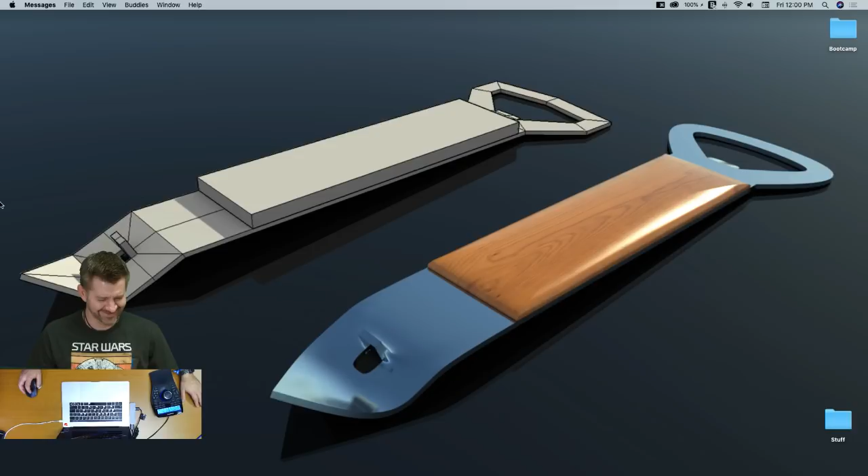We will officially, kind of officially get this thing started. Is this like the Waiting for Godot episode of the SketchUp live stream? That's right. So we already covered, unfortunately Matt is not here. He's here, but not here, so he's hanging out with you guys on the other side of the camera. We do have Mr. Mark Harrison over there. You guys can't see him, he's over there, trust me, you can hear him. So he'll be helping out when I am here, help me out when I accidentally ignore you guys.

So I like to think of myself as a little bit of a wild card today, Aaron. I'm going to be your wild card, let's mix it up. The great thing is that I can actually see Aaron's facial reactions to my wild cardness in real time. Yep, so it'll be a mask of professionalism you will see right here. It's always that with you. I know, that's how I roll.

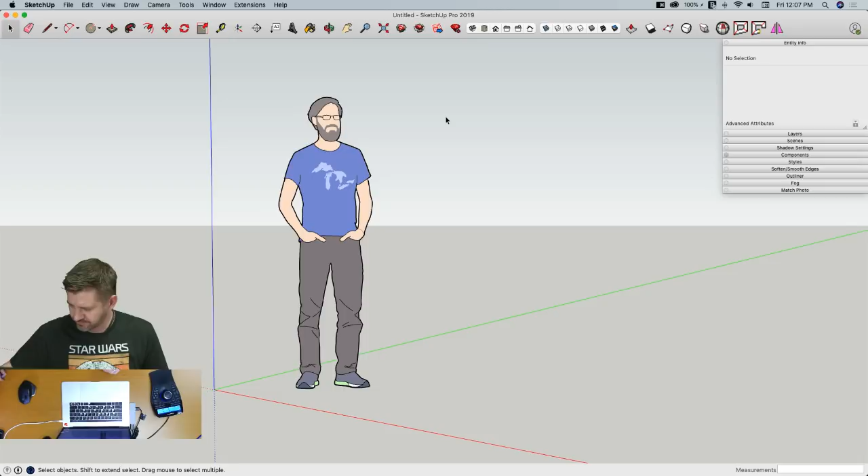We'll throw a roof on here. I have somebody, I was going to write his name down - I think I did, but I don't remember where I wrote it. He keeps asking for a specific type of roof, and it's not that complicated, not that different from a standard roof, so I figured I'd just show it when we get to the roof portion. So that's kind of where we're going to go - continue on down here.

George Knowles, how's it going? He says it's cloudy here today in Wisconsin. I wish we had a little cloud. It's sunny and warm here. And as we've discussed, we don't have beaches.

So Uganda. Marvin's asking about extensions or native. Most of this will be native. I can't say I won't hit an extension somewhere, but I want to do a lot of this with native, not because I'm trying to do anything special or make a commitment to go all native. It's just what SketchUp lends itself to, so I don't know that I'll be using a whole lot of extensions for this one.

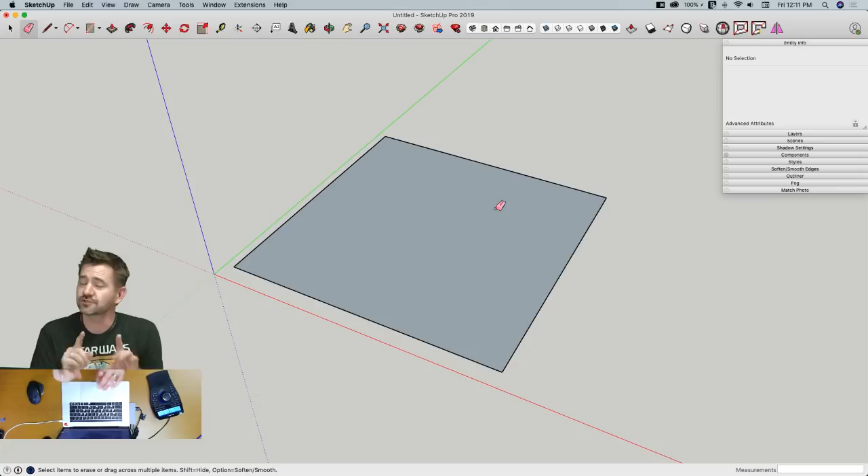I'm not gonna say no. How's that? You haven't said no, but you've said no twice to my ideas. That's right, there hasn't been any no's yet. There are no bad ideas. That's not true at all - we should clarify this, there's lots of bad ideas. There's certain situations where it's not bad to throw bad ideas out though. All right, that's all I'm gonna say about that.

Let's go back to this 8x8 footprint. Here's how I would go through this - I'd say what I'd do is start by initially just mocking up a shape. So I'm gonna take this and pull it up, we'll say 7 feet. I want to put a fairly full height door in here, big enough so I don't have to duck my head going in, but at the same time we don't need a full 8-foot or 9-foot tall shed. So if we go this big, that's pretty good. And then we're gonna have to put...

Dr. Ahmed, you need to stop, you need to be nice. You can't be telling people to shut up all the time. You'll have to go if that's what you do.

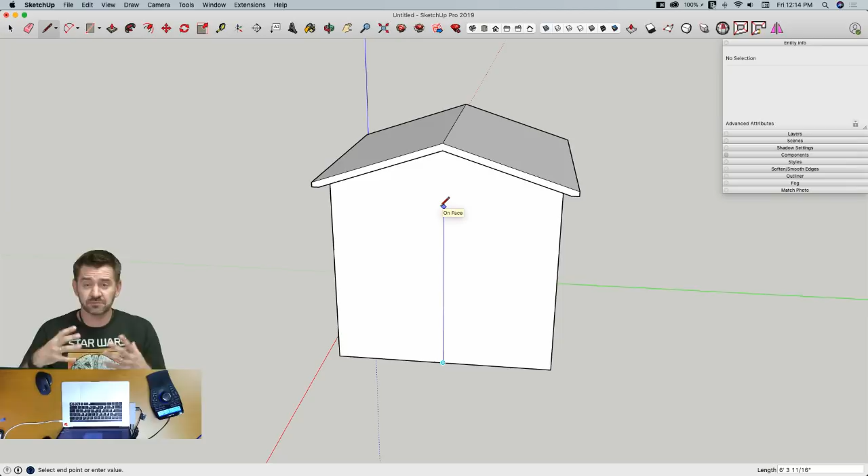I'm going to throw a door in here real quick. I'm not thinking a full height door probably—I'm actually going to build this door too, not a stock normal door. We're going to build a shed door out of some material, so that means we can make it whatever height we want.

I'm going to make it 6'3" tall, and I want it wide enough that my mower can get in and out without too much of a problem. So let's make it 3 feet wide.

The nice thing about this—because I know who's sitting over here—we're going to get the request to change some of these dimensions at some point. It's going to happen. All right, so there's my door.

Because we've already talked about it, I'm going to throw a window in here too. So maybe the concept here is I'm building this—I'm modeling this with the intention of building it myself. So I'm just going to say maybe I want...

I'm actually going to go to ReStore or something like that, and I'm going to salvage a window. So it's going to be a specific size—I'm just going to make up what that size is, because I can, because this is mine.

I'm going to put the top of the opening for the window the same height as the door, so I'm holding Shift as I'm on the blue axis and clicking right here. I'm going to say I got a window that's 3 feet wide and 4 feet tall, so I'm going to draw half of that—1.5 feet—and drop down 4 feet.

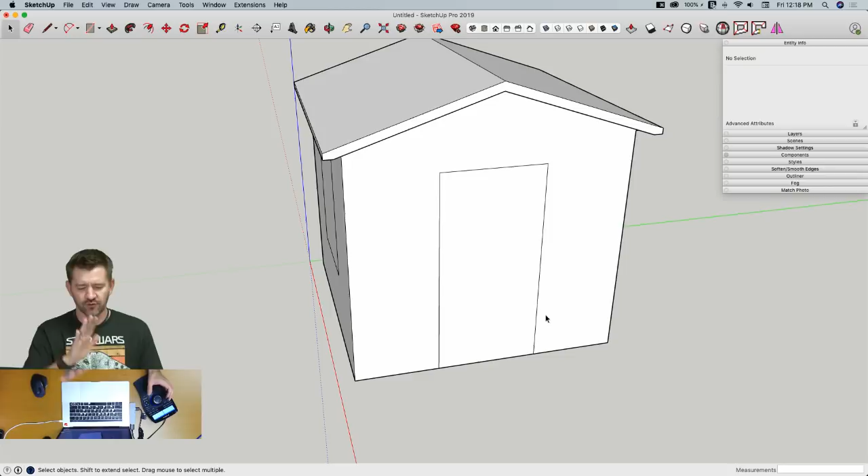Here's the idea. At my house I have a shed, and it has a door that opens out, but I've got a pretty small yard, and there's a tree next to my shed, and things I keep next to it, and a house. So I kind of always wanted a shed door that could slide, so that it didn't create that much extra room outside of the shed. So just throwing one at you there.

Maybe we could try something new later on, like a barn door that could slide across. Exactly, that might be pretty cool. And we've got time, I think we'll have several iterations of this design by the time we're done. So that's a good idea, remember that one.

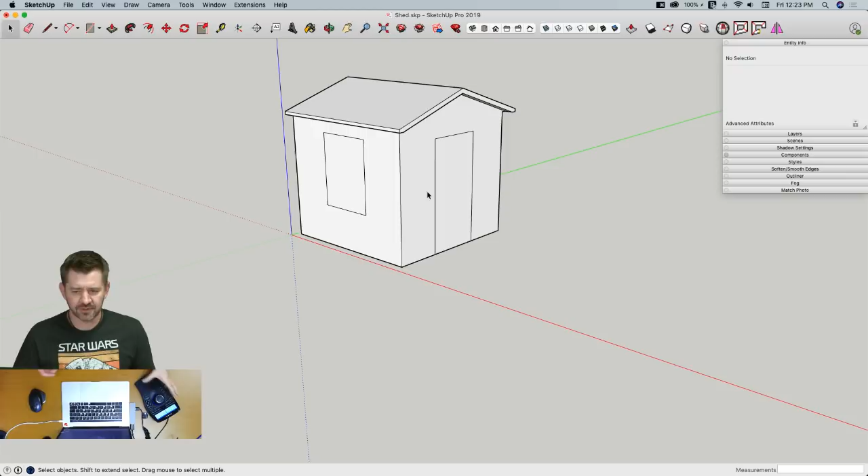So we are going to do that. I'm just going to leave this group right here. If I wanted to, I could right-click and lock this too, just to be safe, so I don't modify it or anything like that, kind of like a safety cover. You know those old switches in the movies where they have to flip off the switch before hitting the ignition button? That's what that is, preventing me from accidentally deleting or manipulating anything. It's pretty easy to come in and unlock it and make a change, but I'm hoping I won't do that. All right, that's enough talking about things.

So what I'm gonna do right now is start the ground and work my way up. I want to frame as much of this as possible, and then go in and check what materials I had and get a list of it. I'm gonna use Generate Report to generate a complete list of the framing in here.

So let's start there. First thing I'm gonna have is my flooring. I have to think about how exactly I wanna do this. I'm gonna try to keep the top of my flooring at this height right here. So I'm gonna come over and draw a rectangle, and make that rectangle 4 foot by 8 foot, enter. All right, this is one sheet of my flooring material.

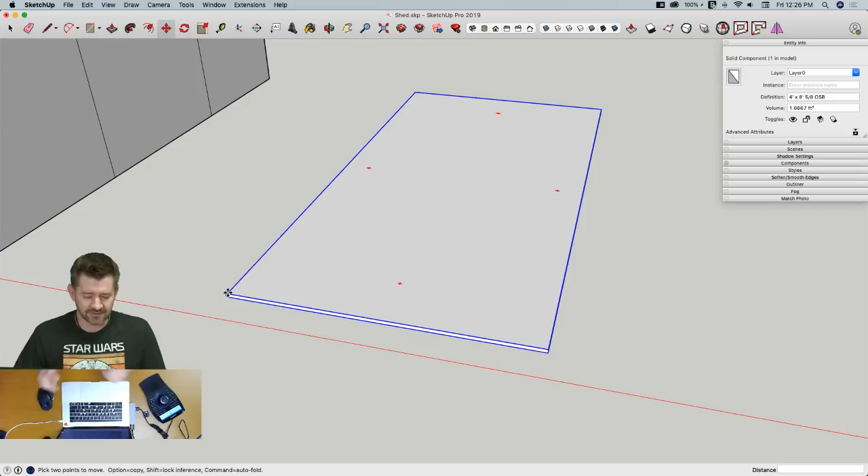All right, so there is one sheet of my 4x8, 5/8 inch OSB. Sometimes the mouth starts and the brain just sits back and watches and sees what's gonna happen - that's what happened right there. How often does that happen to you? More often than I'd like to admit.

So right here, I don't know if you guys caught that either, but I did push pull down. If I look at this directly from the side, there's my red axes - here's the bottom of my building going up, and here's my OSB framing down. So this zero height is gonna be the bottom of my framed wall materials.

All right, so I need... Since you're doing some report generation later, what are you doing with the definition names there? I see you've got the definition names already in the component, in entity info. Yeah, I'm gonna try to be conscious to make a consistent and accurate naming convention as I create these components. You guys know I try to make sure I name it, because I have a lot of bad habits - hopefully you guys are steering clear thanks to my general bad habits. I always had a bad habit of just using 'component', and then when you're done you have component 1 through 78 in your model.

So I'm trying to put names in there. What I'm finding is that unless I'm very conscious and intentional about it, my naming conventions change from one thing to another. So I'm going to try to make sure I name these in ways that make sense. That's right, if Tadros gets a hold of my model, I'm going to hear about it.

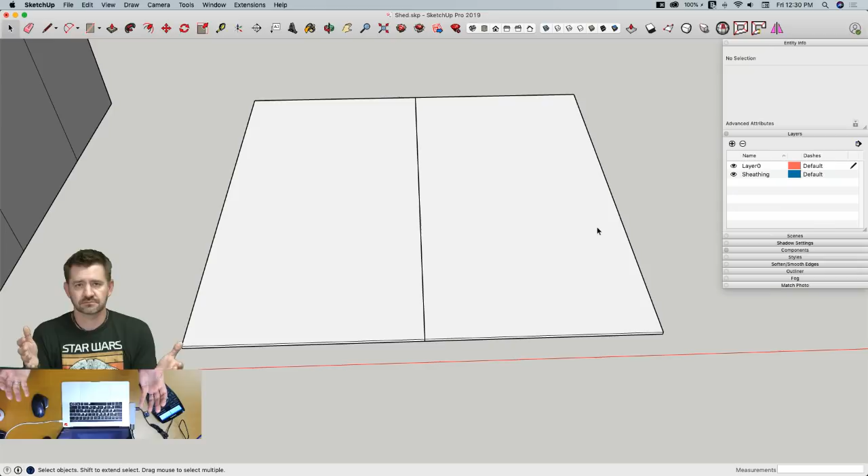So because of the direction of my floor framing, my joists are going to run this direction. Like I said, I'm calling them joists, but they're just 2x4 treated material. They'll be sitting on, I don't know, concrete or blocks of some sort. So they're not really structural or anything like that.

That's the other thing I should point out too - I am not going to go into member design. We're gonna throw some materials on here and assume everything works okay. If you guys have a really strong feeling that a different size material needs to be used, feel free to throw that out. But I can't say for sure, I'm not gonna be too hung up on what the proper span of a specific member size in the given usage is supposed to be. So that's that.

I know David's saying it should - see there, it's like I knew it was coming - be a 2x8. Yes, if it was spanning the full 8 feet and I had residential load on there, you're probably right. But yeah, I'll just put it 16 inches on center, it'll be good.

Anyhow, getting away from all those facts and knowledge and stuff, I'm gonna come in here and start framing. So one of the things I want to be able to do when I'm done, like I said, is get a material list. And that material list should include the number of a given material and the lengths that I need for each. So I'm going to come in here and start by creating a piece of material.

And this is just going to be a 2x4. Or I'll split the difference with you, David, and make the floor a 2x6. How's that? We'll go right in between.

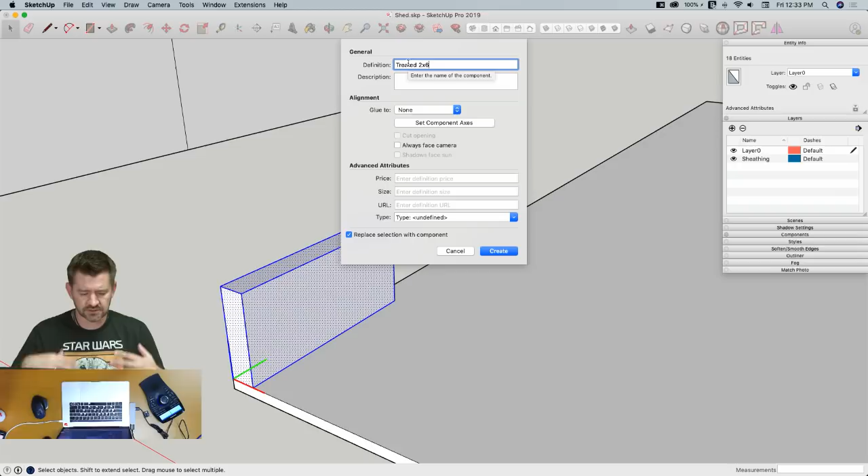So right now, all I've done is I have created this basically 1 foot 2x6. I'm gonna make this into a component, and I'm gonna call this a treated 2x6. I'm not gonna call out a specific material, and I'm not gonna call out a specific length, and I'll show you why. I'm calling it treated because this will be on the ground, touching soil or concrete, so I want to make sure I do that rather than a standard material. Right now, that's all I'm going to put in here, and I'm going to hit create.

There are probably 5 or 6 different ways that I could organize components for a material list using generate report, and that's not even including things like cut list or quantifier or estimator or other extensions I could use to generate this material list. I originally wanted to use one of those, but I didn't have time this week to get them installed and learn them, so that's why I can't do that.

All right, that's done. Now, if I was to run a list right now, what I would see is this: I currently have a single treated 2x6 and 2 sheets of OSB. That's good, but that's not really a good set of information to have for this.

So what I'm going to do is double click into this piece right here. One of the things we can report upon when we pull up generate report is the X, Y, or Z length. So I'm going to reorient my axes on this so that the blue axis faces up. Now I know when I report upon the blue axis for this given material, it's going to tell me the actual length of this piece inside of SketchUp.

So if I come in here, select this piece, go back to generate report, grab my live shed report and run it, it tells me I have one 2x6 at 1 foot long. So far so good. All right, so if I take this right now, grab scale, and pull that to here, and now go File, Generate Report, run it, it tells me I have one 8 foot 2x6. So far so good.

Let's keep going. I'm going to close that, and I'm going to finish out framing this floor. So I'm going to grab this piece by the corner, hit Option to copy, and put another piece down here on the end. These are going to act as my rim boards.

These are my end pieces. So I want to take one now and rotate it so it runs the direction of the joists. I'm just going to grab this one right here, go to Rotate, and Option Rotate this 90 degrees. Boom, it snaps into place. And of course this end is too long now.

So I'm gonna select it, hit scale again, grab it by the middle handle, because I don't want to deform the shape at all. I just want to change that Z length, and I'll snap it back to the face of that board. All right, now I'll grab it by the corner, option copy again.

And I'm gonna offset it 16 inches, and I'm gonna say do that X 8 times. All right, 8 was a little long, so I could actually type X6. I hit escape, so I left the command. I can't do that now, it's too late. Now I have to erase them.

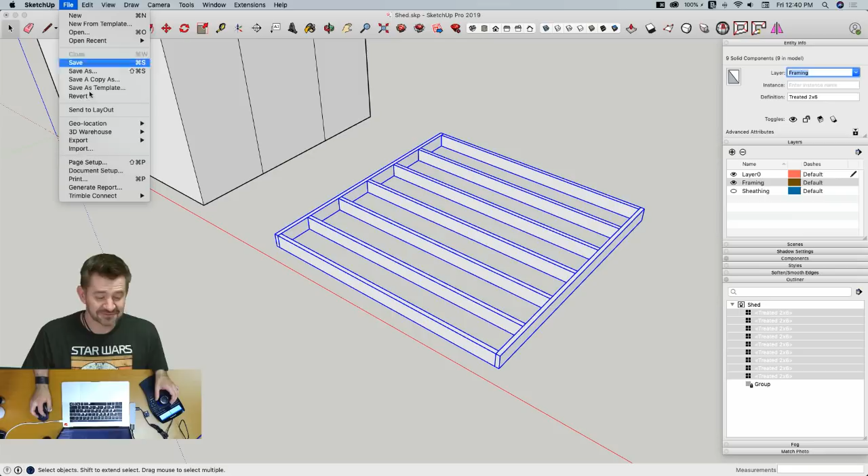So with this, we got a total of 9 treated 2x6s, 7 of which are 7'9", and 2 of which are 8 foot. Okay, so I got a question here.

What happens if you change the group by to the length? If you group by length Z? Let's do that, let's go back and edit this. This is my hypothesis. And I'm gonna grab length Z. Actually, I want to leave both, for future I want to leave both. Boom, even better, right? Good call.

I mean, I haven't seen it because I'm watching you on the live stream. I'm assuming that was a great idea. Yeah, so for now, yay, it's awesome. So I think you have the definition name, the length of the cut, and the quantity. I think that looks pretty good. I think this is gonna be a good report. Aren't you glad I showed up today?

I'm so glad. But by the way, we can wait till the end to really thank Mark, but it is kind of nice to have somebody in here, isn't it? Rather than just having me sit here, you guys appreciate it, you know you do.

What you should really thank me for is, well, actually I have to say, I'm reading the comments, and there are lots of people on this thread who know way more than either of us about actually building and making one of these sheds. So I just want to acknowledge there's lots of input about things you would actually do if you were building this right now that would be very worthwhile, but might slow us down a lot. So just acknowledging that probably things are a little uncertain.

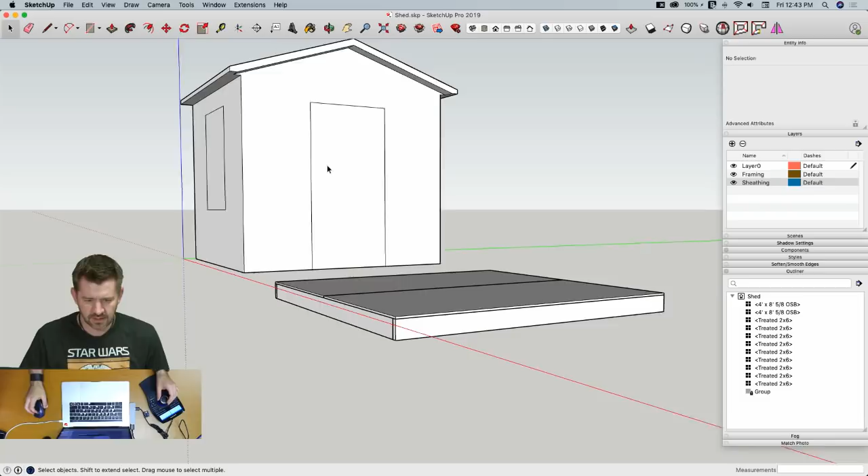Next step, next thing we need to do. Hey, somebody's just throwing out some ideas here.

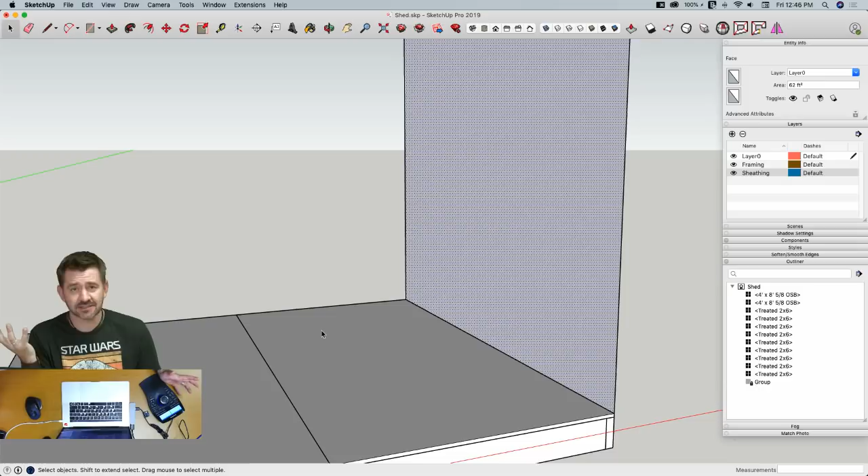So I'm going to frame this now with some more 2x4s. One of the things I was playing with for a shed, something like a shed, is you could actually build this pretty easily out of 2x3 material or smaller material. I thought maybe we'll just go ahead and put this all in as a 2x4, acting like that was the easiest thing we had access to, whatever. And then maybe what if we wanted to come back and frame the whole thing out of 2x3? What would that do to things like our pricing or material list or anything like that? Or our comment stream, or our comments that blow some minds.

So I think I'm going to do that. I'm going to start with a 2x4. I'm going to come down here on the edge and draw a rectangle. That rectangle is going to be... come on, let's get it together. There we go. Is going to be 3.5 by... I could put 3.5, comma, 1.5.

And I'm going to do the same thing I did before. Actually, I'm not, because I don't want it to join with that other geometry. I'm just going to select this piece right now, make it a component, and I'm going to call this my 2x4 plate. Whoops, or an 8x4.

Why not, before you click enter there, you can set the component axes. I could. Look at that. One less step.

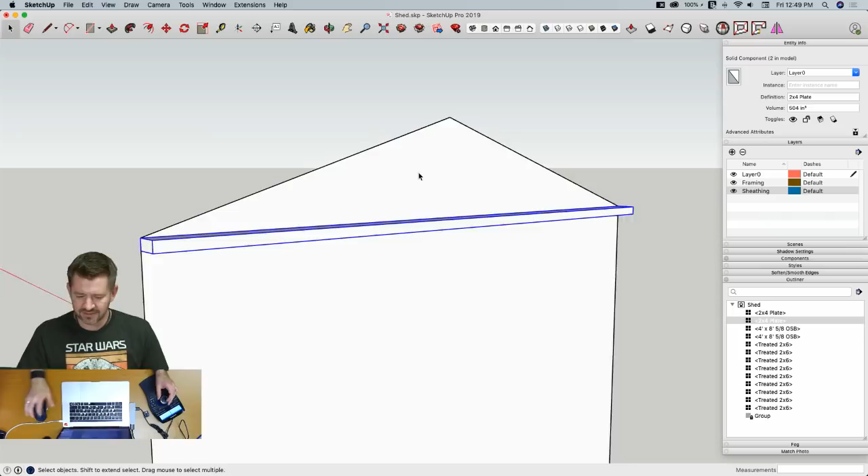I was thinking about building this as a gabled wall basically, having this come up, but I think I won't do that. Actually, after I did this, it's going to be such a small space in here that if I drop a vertical member here and maybe one more here, a piece of blocking, I should have plenty of space for my sheathing to go on.

I'm going to do it. I'm just gonna - all right, so I'm arguing with myself, yeah, so.

Now, people ask - so like I said, I used to do building design, and I used to teach people how to use proprietary software to frame walls. And that was a treat, because as many people as there are on the earth, there are different ways to frame a wall, and every one of them's right, and everyone else's is wrong. So it's kind of funny, because I'm already thinking of 5 or 6 ways we could do this.

I'm just going to stop thinking and talking and just make it happen. I'm just going to do it. I'm probably going to overframe this for a shed, just throwing that out there now. I could probably scale some of this back and not put quite so much material in, knowing it's a temporary structure, but I'm going to frame it in the style I would a real house, a full-size house. Because this was kind of in lieu of a full-size model.

So I'm going to go with that thought and say, okay, if I was actually framing these corners, how would I frame them? Knowing that if you were actually framing for a shed, you could probably dial some of this back and save some of this material.

Speaking of which, one of the things I will do is double my top plate. So I'm going to grab this one, make a copy straight down like that. And I'll come back to that in a minute. Now what I want to do is put my vertical stud, my stud material going up. These pieces are plate material.

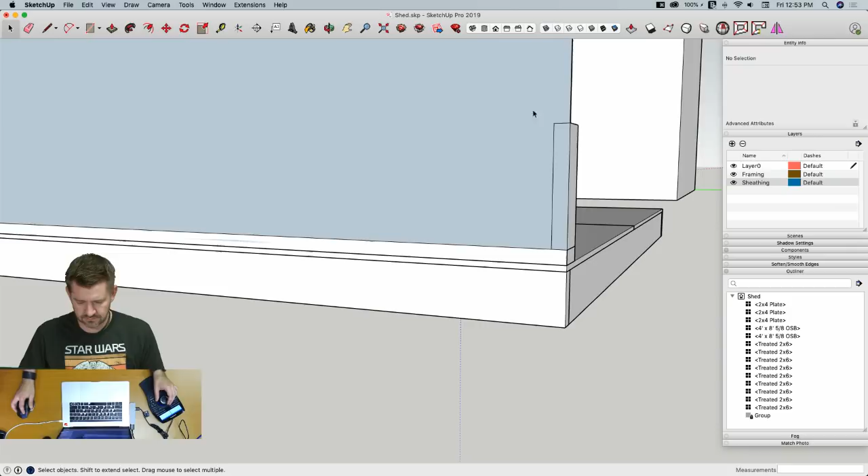Possibly. I just goofed that up because cut opening was turned on. I currently have this up against the flat of a face, so I was getting confused why I did that. I didn't realize that was turned on. Turn that off and set my component axes. It's not even gonna let me do that. There we go, now I can set my component axes and call that 2x4 stud.

So yes, it would be possible to play with glue to, so it drops in automatically. But I didn't mess with that in this particular one. Doesn't mean we can't do it in the future, I just didn't do it now.

All right, I'm gonna take this one, use scale again, pull this up to the bottom here. I'm gonna grab a copy of it, option copy, over to the end of my wall. And I'm gonna do this - draw a line across here, and then get rid of that geometry that I had there. Whoops. There we go, so that's what we got so far.

Like I said, this is probably not gonna have insulation in it, it's not gonna be holding up a second floor or anything like that. So my inkling would be to place these studs at 24 inch on center. So I might grab the first one, option copy, 24x3. There we go, that looks pretty good.

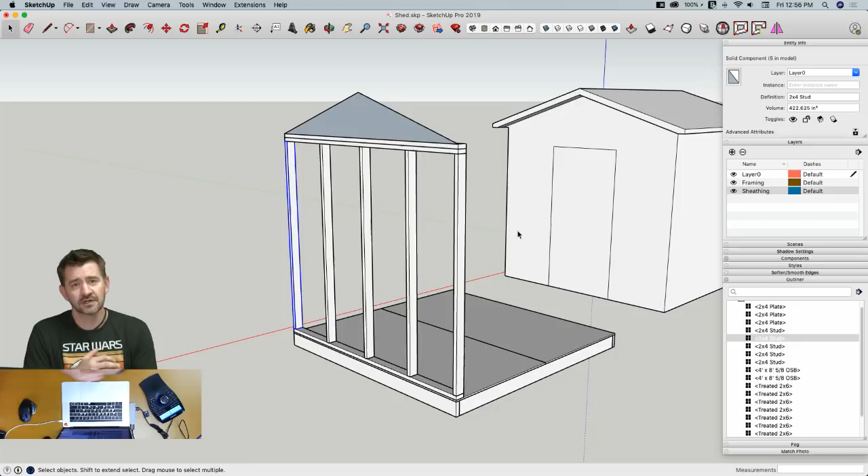Let's keep moving. All right, next thing I want to put in here - Jimmy's pointing out that these will not be pre-cut studs because they are an odd length. What was this, 6 foot 8.5? So I wouldn't be able to use pre-cut studs for this length. I could buy pre-cut shorter studs, but then I'd still have to go cut them. So that's something else to weigh in - when you're looking at material, what's going to be the best way to get the most out of this while keeping it at the head height I need.

So if I had a smaller set of material, if I wanted to use 6 inch or 6 foot studs and have a smaller door, I could do that. I wanted a full height door, that's a requirement of my shed. I'm not going to duck for a shed - just saying. All right, moving on.

So let's get our door in here. To keep it simple, I'm gonna trace this door. I'm gonna select it by the middle, and put it in the middle of our bottom plate - right there, that's where our opening's gonna go. So again, this is where I'm gonna have to come in and frame this opening. I can't just cut the hole in the wall, I'm gonna have to put something around this opening.

So what I'll do is I'll grab this stud right here, and I'm gonna make a copy of it right here, right here, make a copy of that right there.

Now I need to put a header in here, something to support this opening. This is a spot where we have a 3 foot span, so it's not going to hold a whole lot of load. It's just going to hold a little teeny bit of roof right here.

If you felt compelled, you could frame this as a full structural header. How much space do I have in here? 7 inches, so I could put like a multiple ply 2x6 up there if I wanted to. I'm just going to use 2x4 for this.

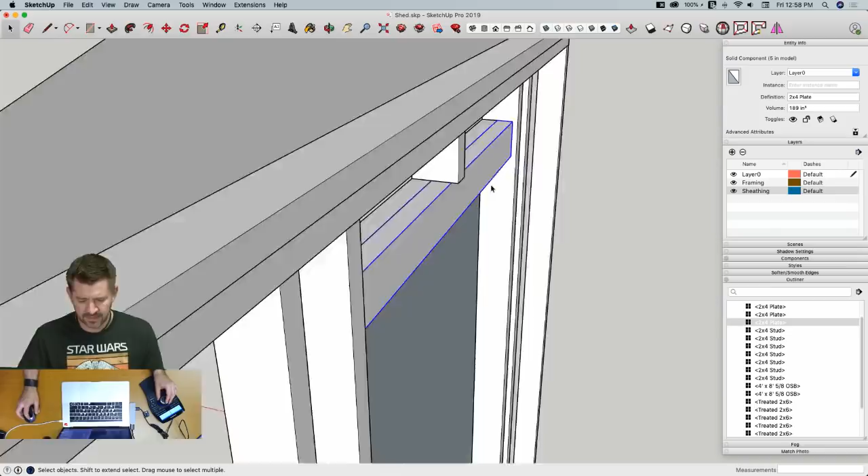All right, so we're getting there. This is okay. I'm going to double this header. So I'm going to grab that piece right there, Option copy, and make a second one right there. I think that 2x4 for 3 foot should be strong enough to hold up the weight of that door opening. I'm not too worried about that.

What I do want to do, and again this could be overkill, I could probably end screw these in and that would be strong enough, but in the spirit of framing this like I would a house, I'm going to grab both of these pieces, use scale to drop them down below my header. Then I'll grab both of these, use scale to pull that out to here, pull that out to here, and then grab a full height member here, throw that right there, and another copy right there.

All right, so with that, that is close to our fully framed front wall for our shed. Like I said, this is probably excessive. I could get away with a lot less.

In fact, if you ever go to one of the big box stores, Home Depot, Lowe's, something like that, you know those sheds out in the garage? If you ever go in there, you can see that there is very little actual lumber holding anything together. I think they rely a lot on the idea of the entire component, the whole thing being a component that works together. So the sheathing gets tied to the 2x3s, which get tied to the sheathing and the 2x3, and it's all together. It's a solid piece. In and of itself, any of those given pieces is probably a little floppy.

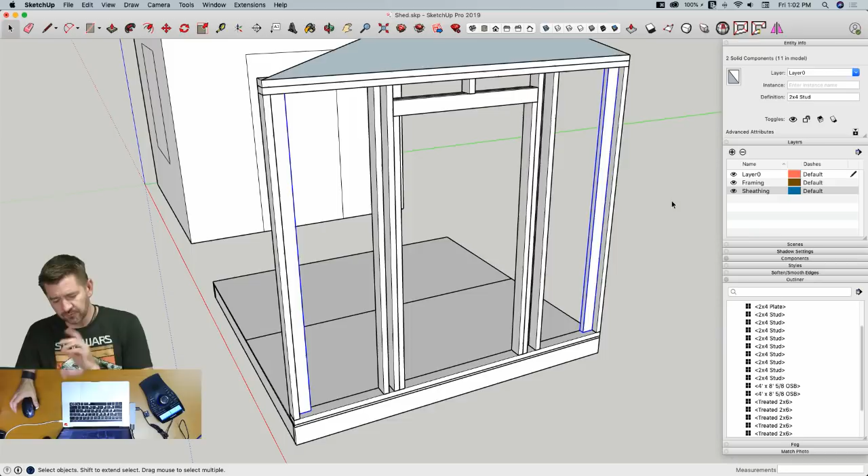Exactly, so it's not a bad thing to do. We could actually do it because it's also a good opportunity to show you how we can create multiple reports in a single job. So I might be able to do a report that says, show me my function versus show me what materials everything's made of.

So we'll do it. We'll go out to these outside studs right here. All right, I'm going to give a disclaimer. You guys will probably, in your experience of building, have different names for some of these pieces than what I throw in there. I accept that, I ask you do the same. I've had full-blown arguments break out in class because people disagreed on what was a jack stud in a wall. So we're not going to go there.

So I'm just going to call this one an end stud. I'm adding an instance name. An instance name is different from the definition name. The definition is all these components together are called 2x4 studs. The instance name says, what is this one specific piece called where it is used in this model? So these two are going to be end studs. These two right here, I'm going to call corner studs. Actually, just corner stud, since it is its own unique thing. These three pieces right here, I'm just going to call stud, because those are the on-center ones.

These two pieces up here, I'm going to call header. I'm going to call these two right here king stud, and I'll call these two right here jack stud. All right, and I'll go a little bit further, and I'm going to call this one a bottom plate, and these two right here I will call top plate. Whew, look at that, all that information, so much data. We're really doing the BIM thing, guys. Don't quote me on that one.

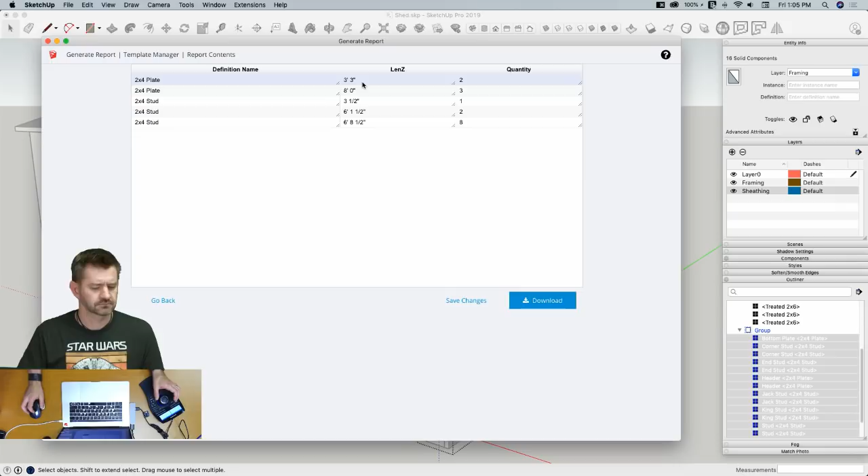Ooh, look at that. So we got two reports for plates, 8 foot and 3 foot, wait. All right, well that's something we're gonna have to look at. Why two of my plates say they're only 3'3"? We'll look at that. The rest looks right.

There's my 3.5 inch stud. Then I have two of them, those are my jack studs. It's 6'1.5", the rest of them all are 6'8.5". For some reason, my top plates, I'm assuming, since there's two of them... oh no, those are my headers. Everything's cool, guys, everything's cool.

That's why you need the instance name, so that you could have some clue of which 2x4. That's right. So we'll throw entity description in here too. Run that same report again. Oops, going back, I did the wrong one. Not entity description, but entity name.

There we go. So we're not segregating by it there, we're not actually separating our output by it, I just said include the information. So this just says these two are two headers. This is a bottom plate and two top plates. These are studs, jacks. This is a mix of corner stud, end stud, king studs, and standard studs. That might, however you do your thing, I'm not gonna tell you, but that might be good enough for what I need to print out. So if I'm just going and cutting, I could go cut it, label these or whatever, and then I know when I go to put together my wall, I have all my pieces. This isn't necessarily telling me where they go yet.

I could also go back here and move entity name up under group by. When I run the report now, it'll tell me you have a 2x4 plate that's 3'3" that is a header, and there's two of those. So even though these materials are all, for all intents and purposes, the exact same,

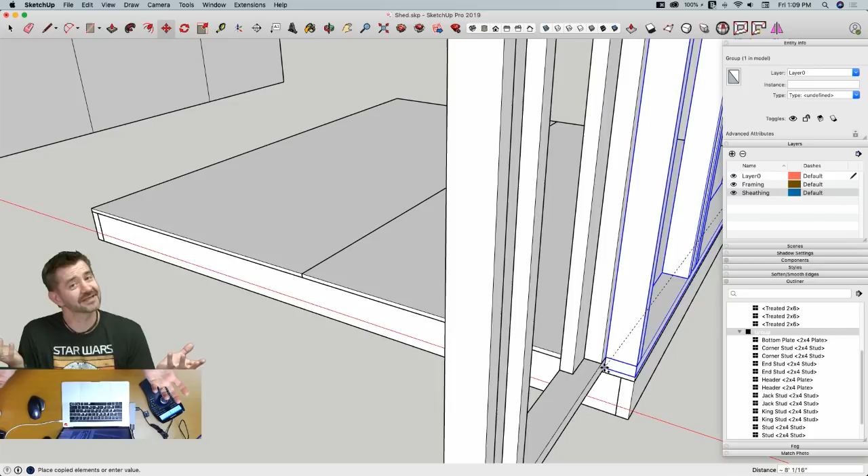Nathaniel Wilkerson also says this is BIM. And if you guys have heard my podcast, you know I have some thoughts on BIM. I won't go into them now, but I agree. This is Sparta. As soon as we can come up with a mutually worldwide agreement on what BIM is, then I will say whether or not we're BIMing. Until then, everything's BIMing and nothing is BIMing.

That's what I got. All right, I'm gonna grab this wall by the corner and slap it right here and use rotate to— whoops. Oh, Dave's got your back here too. We just have a door on each side.

Just progressive design, that's right. Whatever. All right, so this is too much, obviously. And this is just a group, this is not a component, so I can make whatever change I want in here.

I know that I can get rid of this stud right here. I can get rid of all of this framing right here, get rid of all this framing right here and this piece right here. That maintains my 24 inches on center.

I could take this guy and use scale to pull him back down to full length. I can grab this guy right here and slide him in. This end stud's not going to come to the end of the wall, but we'll probably do the same thing here where the other end wall will go full length. So I need to bring that in another 3.5 inches.

Then I can grab my top and bottom plate, scale that— whoops, grabbed the wrong handle. Scale that back to the face like that.

That's pretty good. And we have another comment here, which I think is a good point too: if you're going to put a window in one of these walls, wouldn't you want to maintain part of that header to move it around for the window?

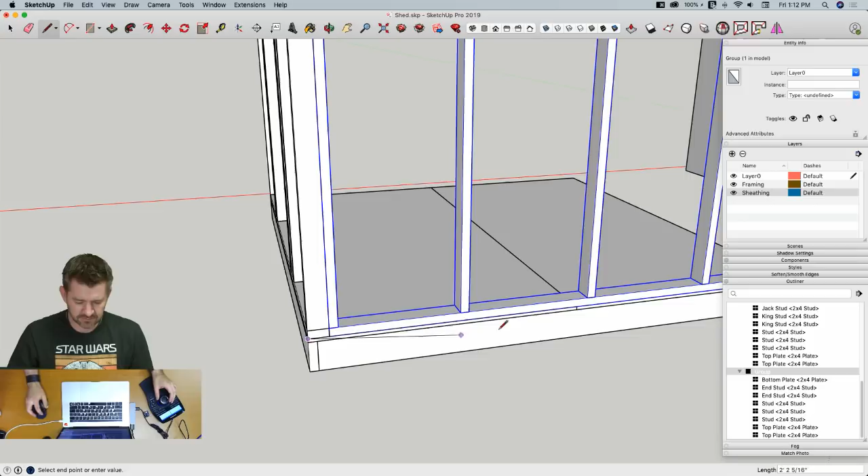So right now, let's just say I was to come this way, 4 foot, and then bring that 4 foot straight up to here. This is less than a full piece of sheathing, so that is very good.

All right, so that is temporarily my sheathing piece. See, the issue we have right now, and this is where SketchUp excels. This is why I love using SketchUp, is it's so easy to visualize this kind of stuff.

So the problem we run into is that our on-center spacing is nowhere near this stud. To have this sheathing break over a stud, I'd have to break it right here in the center of this one, use a full sheet here, and then use a partial sheet the rest of the way. So I'd end up having to split my sheathing and use it on either side. That's what we call dumb in the industry. D-U-M, dumb.

All right, so what I'm gonna do instead is grab these 3 middle studs, and I'm gonna slide them over. I'm gonna grab them by the midpoint and bring them to right here. That's gonna give me, so I have to come out to the end of here. That gives me 4 foot this direction, 4 foot this direction. I'm good again.

I can get rid of this. Oh, now I have all these lines on top of my groups. Oh, loose geometry. If only there was an extension that would just clean it up with one click. There is. I could have run cleanup. I know somebody out there is already thinking it.

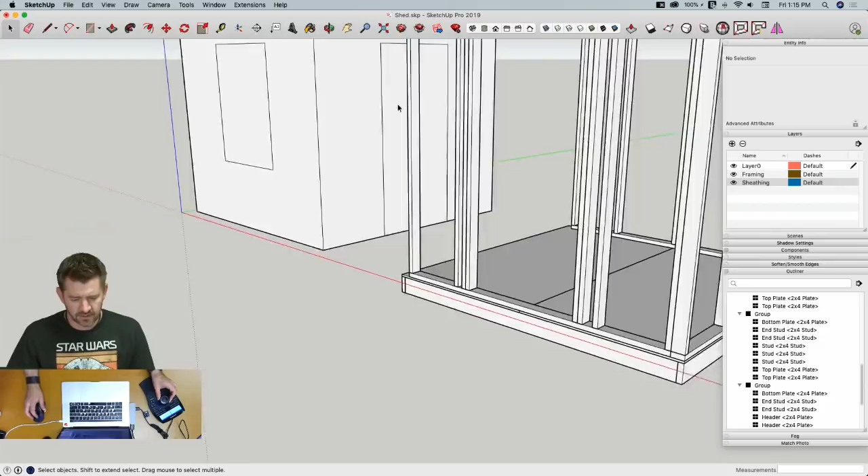Not quite there, of course. I do have to bring this down. So I said I wanted 3 by 4 was my window size. So that means I want to go, and again, I know rough opening size versus finish versus whatever. In case you guys didn't catch this, what I'm proposing is that I bought a window, reclaimed window or something like that, and the actual measurements was 3 foot by 4 foot. I'm sticking with round measurements because they're just easier for my brain to do.

So what I'm gonna do then is I'm gonna grab this line right here, and I'm gonna move it from this intersection point, Option, drop it down 4 foot, Enter, and now I'm just gonna use Rotate on the green axes to roll that flat. And there's my bottom sill for my window.

Obviously it's too big, it's running through the studs on either side. So I'm gonna select it, I'm gonna hit scale. And again, I can't see it, but if I'm careful, I can hover over the middle handle and scale that back. All right, it's looking better and better every time I look at it.

All right, so now I need probably something to hold up the bottom of the sill, and I gotta maintain this on-center spacing, so I'm gonna wanna copy this stud down. So I'm gonna do that right now. I'm gonna select this one, Option, and I'm gonna constrain to blue axes and drop it to the bottom of the sill, scale, and bring that straight down to here, and then make a copy, Option, copy here, and click Option, copy to here. And with that, our window is framed.

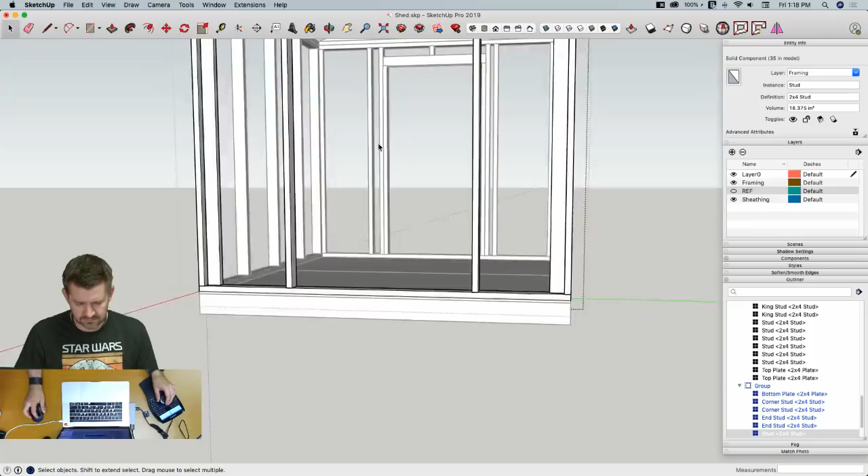Oof, not to make light of any of it, but some terrible luck with weather and wind. I saw a hurricane took someone's shed down. So very sorry if this live stream is bringing up any traumatic memories, I hope I'm not upsetting anybody. But seriously, let us know if the shed's just going down. Sorry, this is not supposed to be a bad thing. If anybody's flashing back and you want to step away, I won't take offense. So it's a triggering episode. Sorry guys.

Going back to what I was saying earlier about the purpose of the on-center spacing, I took this first stud and offset it 2 foot and created an array. The issue is that was 2 foot from the corner, the edge of the stud, to the next stud. Or maybe I came this way, I can't remember which one I started with. There we go, we're 2 foot edge to edge. That's okay, except when I come to this next stud, the one in the middle, you can see that 4 foot falls right on the edge.

That means if I grab a full piece of sheathing, go from the edge to right here, it's gonna fall right there. So somebody could easily argue who cares because it's really not doing much with that 3 inches anyhow, but we're gonna do this the right way.

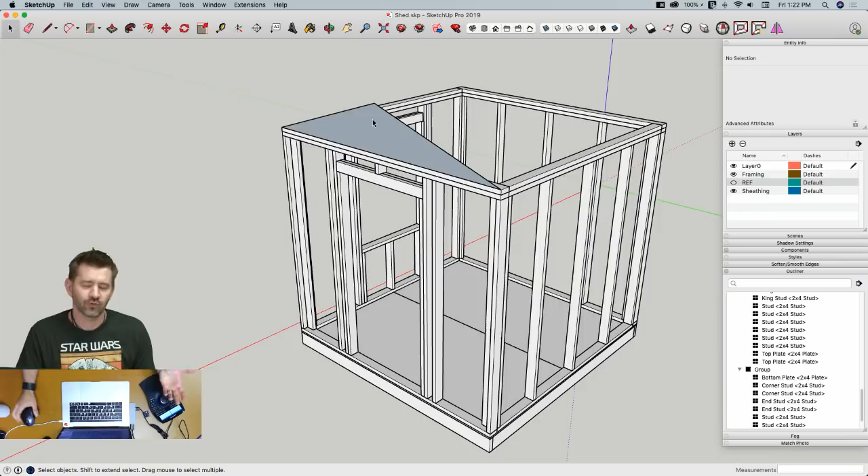Stillwater is great, it's a wonderful spot. They just have horrible weather with the canoes flying through and stuff. We need like a support group following this session. That's right, we're tougher, we got out of it tougher than we were before. My brother did get hit in the head with a canoe, but my head's fine, more or less.

All right, so I'm going to make sure I got all these right, make sure all of my stuff is in here. It's all on the framing layer.

All right, so here's the thing. Let's say I wanted to do a framing report real quick, just my wall framing. If I was to grab it right now, go to File, Generate Report, and say Run, we get everything, but we get too much.

All right, so right now, here's all of our plates. Our plates came on the list first. It did come through with our studs, and we got these four things that are just called groups. We're reporting Z length, so it's telling us our groups are 7'1". Those are obviously these outer layer groups for each of our walls. That's not a bad thing, it's not bad to have those.

There's reasons I may want to report upon it. Again, this is a pretty simple version of a framed house, but if I had my full house, I may actually want to do a report where I put an instance name for each of those groups, wall 1, wall 2, wall 3, wall 4, and I could use Generate Report to report upon those wall names. That is a cool thing it can do. But in this case, all I really want is the data on the inside and not the containers.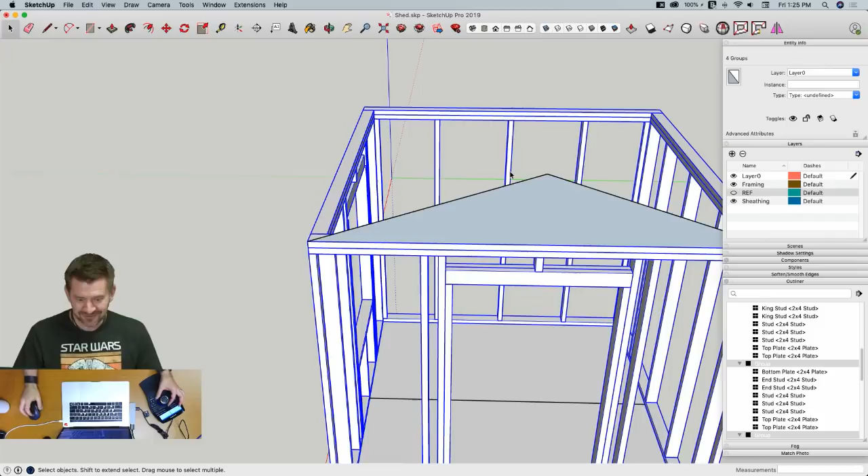All right, cool, so this is looking good, we're coming along. Let's go ahead and let's keep going, I'm just gonna keep moving. We're gonna go throw framing on top.

Here's where we can get— oh no, wait, I was gonna do my plate laps first. All right, so I'm gonna collect. I'm gonna stop, rewind, and try again. I'm going to open the group, I'm going to turn my rest of model back on. I have a toggle shortcut key connected to hide rest of model for when I edit a component.

I'm gonna grab this piece right here and scale it and just push it back to the inside of this plate. I'm gonna do that on both ends. Now I'm gonna click into this one. Actually, let's go shorten up both. I'm gonna go to my end wall, same thing, scale, pull that back, over here, pull that back.

So one of the things that is coming up, professional wall panelizer framer type people will ask about my tolerance. I'm not putting any tolerance. You could, if you wanted to, pull this back by a 1/16 of an inch or a 32nd of an inch to allow for slop or swelling of wood, but it's my shed in my garden, I'm not that worried about it.

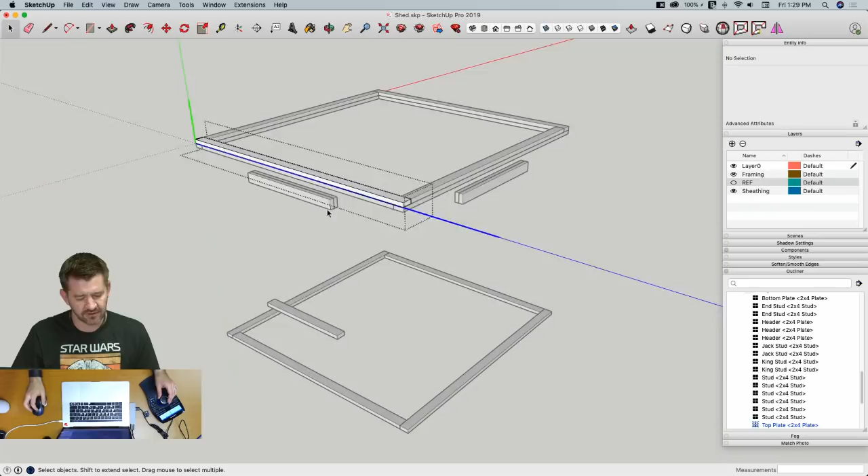This is kind of cool because that was actually what I was going to key in on. If I double click on this, this is going to show all the pieces that are the same component. This is where people go, wait a minute, components are all supposed to be the same. That's true, but because I distorted the container they were in, this component is the same as this component, but that one's shorter because the container's distorted. Kind of cool - same with my plates. If I click on this, I have all these different lengths, different usages, but they're all the same component.

This might be a place where color by layer can start to get useful. Because everything is the same component, even if you wanted to put a material on it to tell the difference, that wouldn't work very well. You don't want to just put materials on the wrappers of the individual components, but using your layering, you could do some more sanity checking along the lines of the report, and you could continue to save your model.

Yeah, I was thinking about that too - a big piece of that is absolutely true. A big piece of that is how much layering do you want to do? Because I could come through here, I could layer by function, I could layer by panel - each one of these walls could be on its own layer. I could layer by, all the studs are on one layer. So there's a lot of options here how I could do that.

And that's a good point. That would be a great way to do it, would be to segregate my framing types by layer and then color by layer.

Someone asked, is scaling easier than using solid tools and erasing the overlaps? Again, using solid tools will change your actual core geometry. That means if I was doing it that way, then this piece right here, this stud, would be a whole different component from this stud right here, which again, depending what you're doing, might be fine.

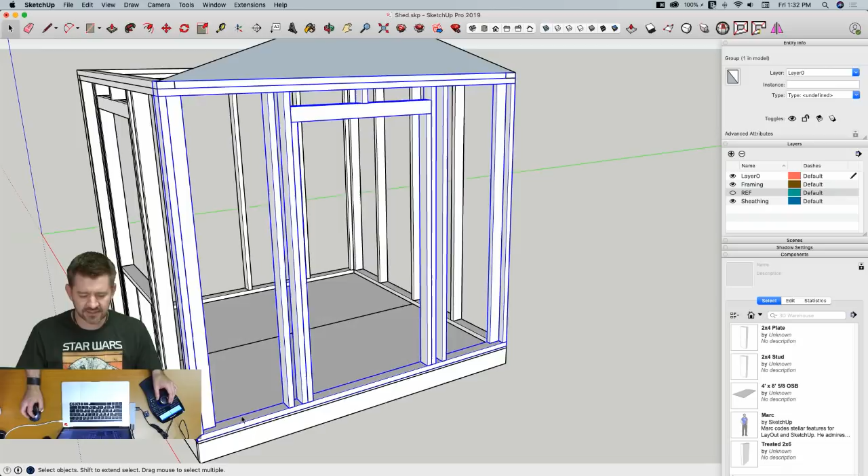I'm gonna leave it like this, because if I was to actually go build this, I'd probably build it laying flat on something like my driveway or garage, maybe even on this deck. It should fit since this is 8 foot. Build the wall laying flat, stand it up, nail or screw it down here and here, get it all square, and then cut this out. So your call.

Oh, that's another point. Dave Richards pointed out that if you use solid tools to intersect, when stuff just ran past each other and you hit intersect, solid tools will change that component into a group, so you won't have it as a component anymore. If you're doing that, right click, make new component. But yeah, I tried to come up with a good workflow to use solid tools to cut all my framing for me, and it never really worked out great. I never got an awesome solution for that one.

All right, moving on.

Well, let's figure out how to do this roof real quick. If I had access to a truss plant and Nathaniel Wilkerson's Medeek software, I could just drop some trusses in here and order them. I'm gonna assume that's not a thing I can do, so I'm gonna look at a couple different ways I could actually frame this.

Assuming I'm gonna have to do some kind of rafter type framing, I'll need to put up a member in the center that would hold rafters coming from both sides. I'm trying to think of the simplest way, literally the dead easiest way to do this. Again, this is only 8 feet, so I think I could probably put a 2x8 across there and that would span okay. Might have to double it up. You guys tell me what you think.

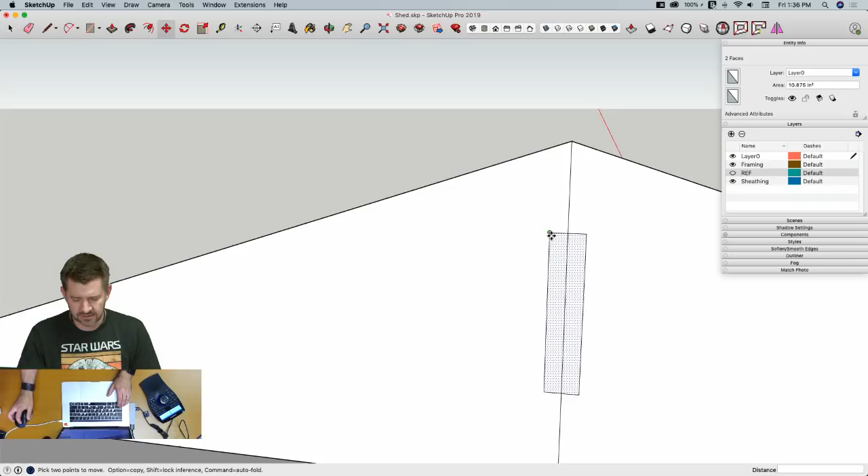Now I gotta raise it up to where I want the roof to be. This is the bottom of my roof rafters, which are gonna sit right here, probably with a clip or something on there. So I'm gonna take these 2 pieces, grab them by the corner, and slide them straight up till it intersects that line. That's where my ridge beam has to sit.

So I'm gonna double click that, make it a new component, and call this my 2x8 — I'll just call it a beam. Oh, anybody else catch that? I wasn't paying attention to what I was doing — I glued that again. Fortunately, we can edit that.

I say edit? Is that where... there we go, edit. Oh, I can't — components browser, I have the wrong thing selected. Select... I grabbed my OSB. Oh, there it is, there's my 2x8 beam. Edit — I want to turn cut opening off.

All right, now I'm going to come in here and get rid of this line in the middle, and same thing I did before, I'm just going to make it 12 inches long. So that's my initial size there, and now I can actually take it and scale it the full length of the building. Not just the full length — I actually want it to stick out a little bit on the front and back, because I'm fancy.

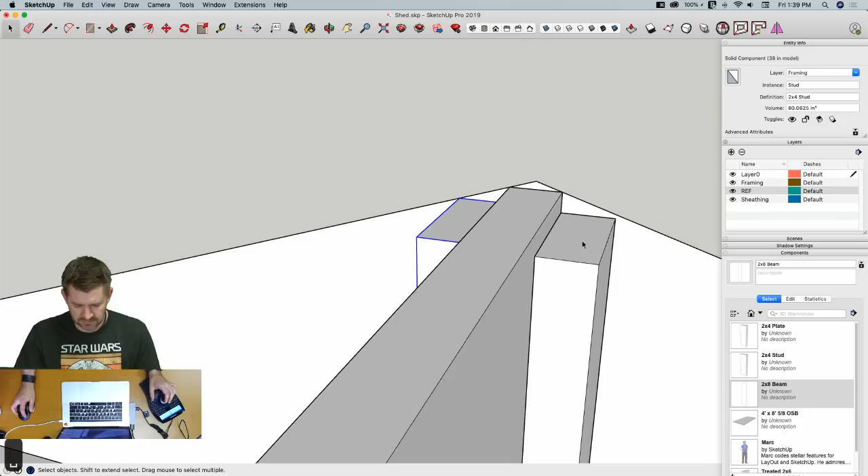Now that'll hold it up.

So a ridge board is a thing that is going to hold up the rafters. So my rafters are going to be sticks, boards that are going to go from here down here. And I need to hold them up somehow.

Dave Richards builds actual trusses for his, so he won on that one. Yeah, this is where your model and Dave's model start to get - they probably become a little bit different now. We'll show Dave's later. Did that get posted? It didn't get posted, okay. It got emailed to me. Okay, I've been enjoying it personally.

All right, here's what I'm going to do. I'm going to grab one of these studs and copy it, and I'm going to come in here and paste this stud in, but I'm going to make it unique because it's no longer going to be a stud. It is now going to be a 2x4 rafter. And I'm going to call the instance rafter. There we go.

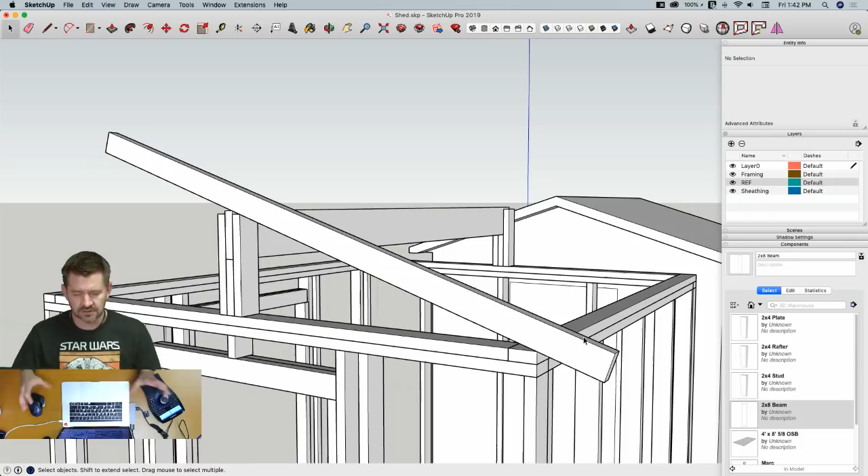All right, so I said I wanted a 6-inch overhang, so I'm going to draw a line right here, call it 6 inches, and run it straight up - whoops - straight up till it hits this face right here. And with that, I can come in here and draw a line perpendicular to the face. That's where I want this to end, so I can grab my scale tool again and pull it back to that surface. All right, now the top end.

So here's the question, because this is going to be interesting - I'm only going to have one rafter profile. It's going to be the exact same front to back, both sides flipped around. But what I would probably want to do is put a cut on it like that, possibly a vertical cut on the other end too. Because if I don't do that, if I put a square cut on it like this, if I was to just grab this right here...

Gonna get funky, yeah, pull this back to here - I would have a problem with my other rafter that's going to come up the other side, or, you know, wait, how is it. I'm trying to do this on your screen like a weatherman. I could never be a weatherman, I take things too literally when I see them.

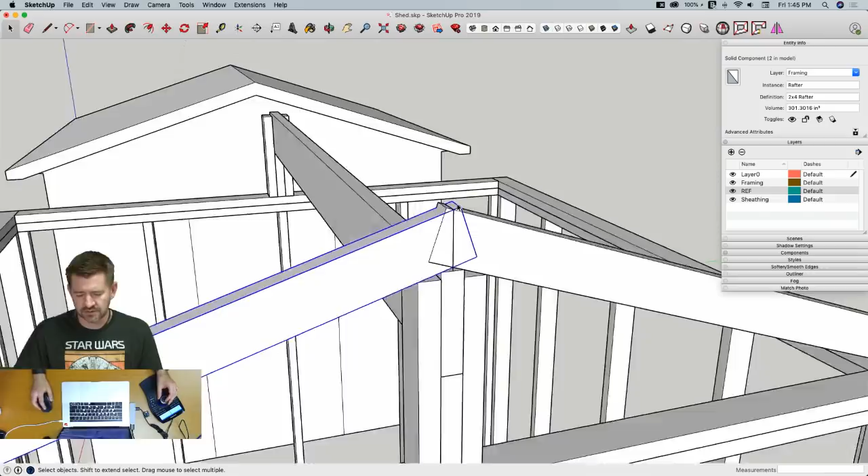You might want to do something like, I'm going to throw out lots of thoughts I'm having right now. If all I was looking for was a length, I just wanted to know what material lengths I need. You could leave it like this, and then when you went to mirror it, so if I was to grab this and mirror it over here for the rafter on the other side, you could leave it long like this, which would give you this full length, and then you'd have to be in charge, make sure you know you'd have to angle cut this at the end, that sort of thing. Not a big deal, but that would actually allow you to keep the same component. You'd have to know that you actually do want to make sure that when I pull this back to here, pull this one back to here, that would allow you to keep that same square cut component. So you'd just have to know that you're going to cut that at some point. But like you said, that is different from the roof rafter, basically.

I guess, right, you have to do a make unique for your first one. Right, since this is the only one, that's what I was saying, I would just cut it like this and then know that that's the piece I'm actually going to use.

Okay, so with that, I'm going to take these, option offset horizontally, 24. I should have to do that 4 times. And my last one, again, is going to be a little bit off.

So actually, here's what I should do. I'm going to get rid of what I just did. My sheathing will start right down here, because this is the flat end, right? So I'm going to start my sheathing here. It's going to go this direction, so I'll grab these two, take them, offset along the red axis, 24, times 4. So something like that is actually kind of closer to what's going to actually happen.

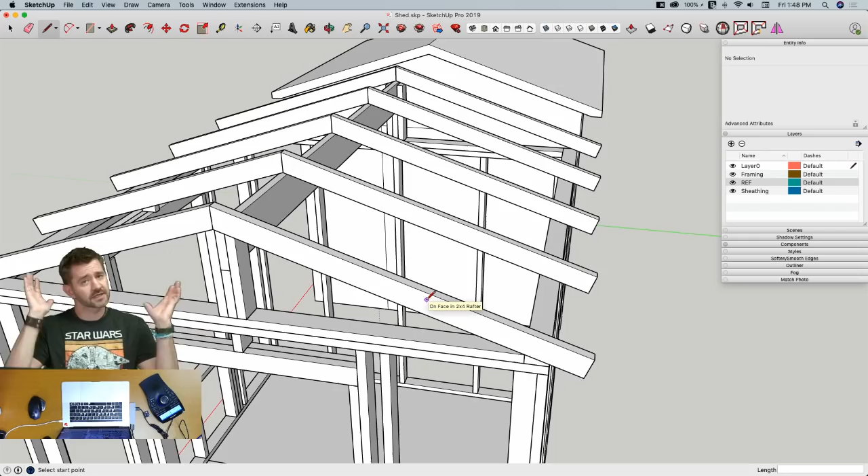It is pretty commonly done with larger material. The reason I probably wouldn't do it with this is it's only a 2x4, so I don't have a whole lot of material to cut out there. And again, dozens of ways to skin a cat. I would probably rely on hurricane clips on the top of the wall at whatever, 70 cents each. I would rather spend, you know, $15 in hurricane clips and just clip those onto the top of the wall rather than having to bird's mouth or bump up to a 2x6 and have enough space to bird's mouth it. Your call. Again, so many different ways to build things.

It's cool, it's fun. All right, so we're looking pretty good. There's probably a couple more pieces I would add, including, on the front here, I have to make a decision on what I want to do. I said I do want a little bit of an overhang here. I don't want it just to be flat up against the front. Maybe I will just have it stick out 3.5 inches, make it a whole lot more work for me for no particular reason.

Now let's go ahead and take this rafter, or this piece right here, and offset it.

Well, what should we do? All right, so if I was to take these ones back, we make that flush. So this right now, we could just sheathe right over, it would be flat, it would be perfectly fine. But what if we wanted to make it kind of cool and I wanted to take this and have it offset 6 inches? How would we go about that?

Well, we do something like take this guy right here, maybe he'll stick out like that to support that in the middle, and we could even do something like this. We come into this top plate right now, right here, and we would stick that out like that. I don't know, I don't like that. I don't like any of that.

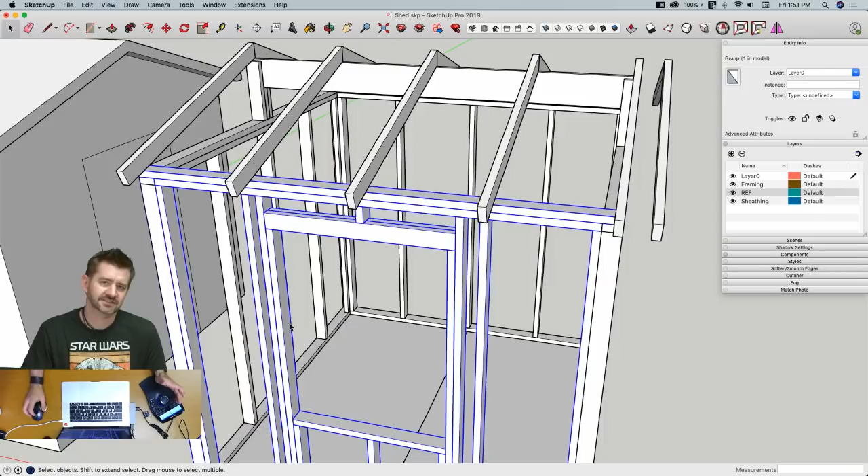Let's go ahead and... Nathaniel's saying too, this is such a small overhang that I could put a couple pieces of lumber around here to connect things, and then the sheathing will take care of the rest. That'll be fine, I was just trying to get fancy. I was trying to do something pretty. I let it go. Pretty things, there's no place for pretty things in the world of construction, except me.

All right, I'm gonna take this piece, copy it, and come out here, paste it. I'm gonna rotate it 90 degrees, grab it by the end, and I'm just gonna put this. All right, now I'm trying to think of where I should actually put this. I'll probably actually just put it right here. And then I'll rotate that, oops, like that. Basically create kind of a fascia right there.

And by doing this, I'm actually giving myself more than a 6-inch overhang. So if I was really hung up on that 6 inches, I could come in and pull that length up. Really what I would do is see what happens with sheathing. For me, this is a variable number, and depending on how the sheathing lays out, I may extend or shorten my overhangs just to make the sheathing work out better.

This piece right here, though, I'm going to call it... this will be whatever my rafter material is. Oh, nope, actually, so I shouldn't do this, I should delete this. No, I can't make it my rafter material, I have to make it unique, because my rafter material is not square cut on the end. So I'm going to call this 2x4, and I'll just call it what it is. I will incorrectly spell the word fascia. All right.

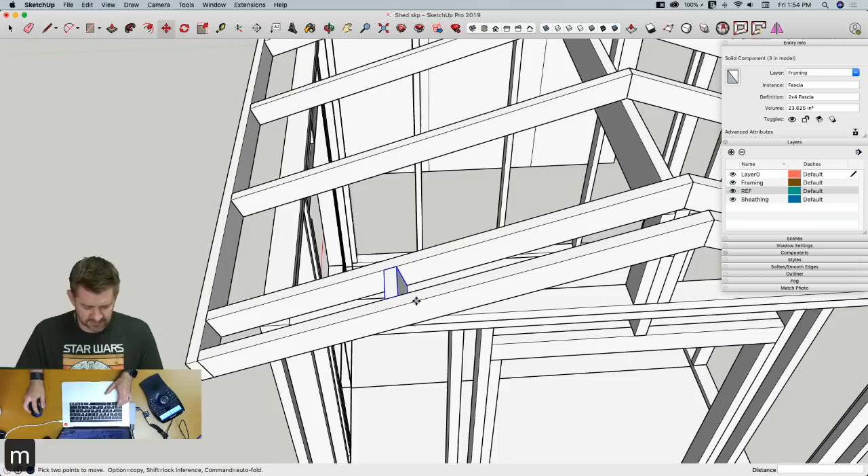And then I'll offset another one along the ridge, 24. Oh, I deleted my flag, I'll have to put another one in. And just mirror that with an option and a click from Curic. All right, yes, that's probably more than we would actually need on there, but I feel better having it. And it accounts for less than 2 feet of wood, so I'm good.

At this point, I am gonna grab this entire roof, everything that makes up the roof, and make that into a new group. So now I have 1, 2, 3, 4, 5, 6 groups thus far, and I should have my sheathing on one layer and framing on another. What the heck, ridge board? On framing, there we go. Framing, sheathing. All right, everything's coming up so far. This is good.

All right, let's go in and save, because I'm gonna do that.

Let me take a peek up here at what everybody's saying, because I'm not paying attention. Okay, there was the bird's mouth comment, I remember that. I'm good. And MJ Jason is referring to these support pieces as cripples, and I've always used the term cripple, but I've heard other people use other names, so I don't ever call them out as that, just because some people don't like that name. I don't know why. I don't know what Craig was referring back to.

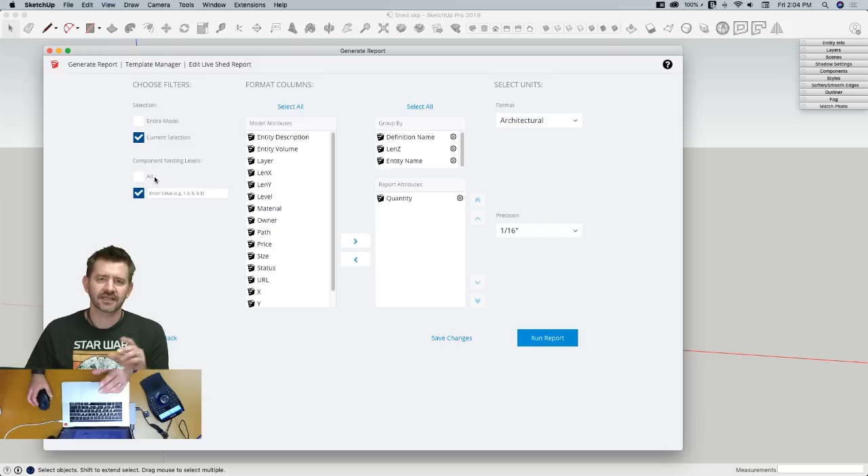I saved it as report all. I don't know if you guys remember, I went back and saved everything as report all. I made a change so it was reporting on nesting level 2, but I never saved that - I just said okay and ran it. So I'm gonna change it to 2. I'm not gonna save it now either, I'm just gonna go ahead and run it. That should give me all of my material.

So there, from the bottom up, there's my treated material. There's my flooring OSB, and then here's my ridge beam, all my other materials. Sweet, pretty cool. I could work with this, I could build off that right there.

All right, let's close this thing up. Let's get some sheathing on here. I'm gonna select this wall first, I'm gonna turn off the rest. And I guess I have to decide what I want to use for my actual sheathing.

Dave mentions that his wood shed is built like a brick outhouse. But I'm surprised, I was expecting - didn't you say, Dave, that you had put windows up high or something like that to let light in?

That's pretty cool. And Jimmy's pointing out that if you type tomato with enough extra A's in there, you can tell it's pretentious. That's an important thing to learn here as we go through this sort of thing.

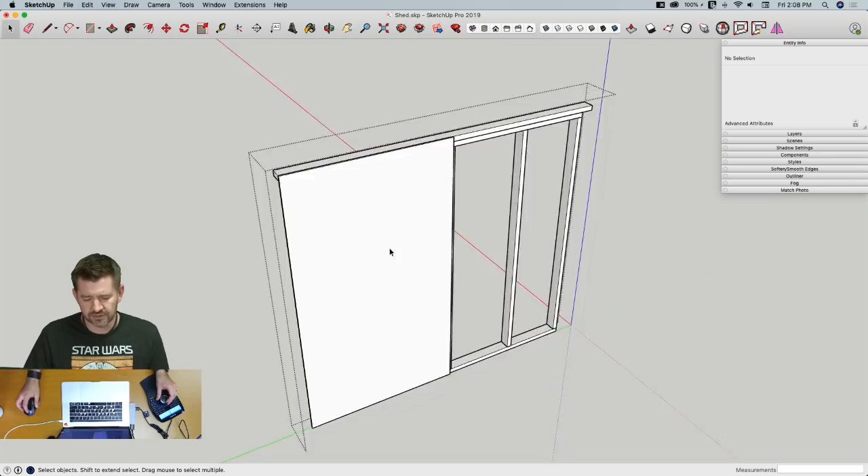So that's what I'm gonna do for this one. Yeah, it might be lap siding. I'm not, like I said, this is kind of a - this could be just about anything. Your call, really. And if I look at this too, here's the other thing about this.

If I look at this, I can really use any material I want here and throw it onto this thing. I don't really have any real weird material considerations. I don't have any inside corners where I'm gonna have to pull back siding to make it lap over itself. I'm not gonna really worry about the corners because I'll probably just put a strip down the side to cover that up. So it really is kind of a do-whatever-you-want-once-you-get-in-there situation.

So I'm gonna come in here and copy this because it's exactly 8 feet, that means I just have 2 pieces. This piece is 7 foot 1 inch high, by the way. When we go report upon it, because it is vertical, it's gonna tell us that it's 7 foot 1 inch. That'll be our cut length for our board.

I'm gonna come in here and grab both of these, put them on the sheathing layer, and copy them. And now I'm gonna go around to my different walls, turn off my reference layer, get rid of that, come into this wall, Command V.

Oh - I have V as my shortcut key to Vertex Tools, so I didn't hold down Command. What? All right, what's going on here? Command C, click out, click in, Command V. I'm gonna take full responsibility for whatever was just happening right there.

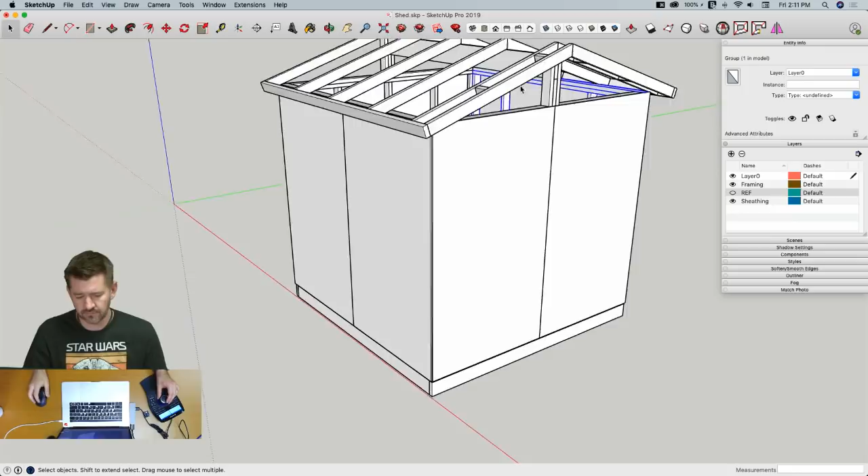So here's a couple things I could do. I could make multiple layers. I could have a layer that is for my cut material and turn that layer on when I select to report. And then I could have a separate layer, my beauty layer, which will have modifications of the original component just to show how it's going to get cut. This is still useful because you may actually want to, I don't know, you probably wouldn't pre-cut your siding—it would probably be much easier to cut it to the opening, but it would be possible. So I'm going to go ahead and do that.

I'm going to make a second layer. I'm going to make a new layer called Beauty Sheathing. Yeah, I spelled it right.

All right, so on my beauty sheathing layer, I'm going to make a copy of each of these pieces. So I'm going to say Control C, Control V—actually, not Control V, I'm gonna say Edit, Paste in Place. When it pastes it in place, it puts it exactly where it was before, so it's on top of my current layer, or my current sheathing, but it's the one that's highlighted.

So if I come to layer right now and choose beauty sheathing, now I should be able to turn off sheathing, and my beauty sheathing's there. I turn off beauty sheathing, and turn on sheathing, that's there. So this is an option. I do have to make sure that I only have one of them on at a time.

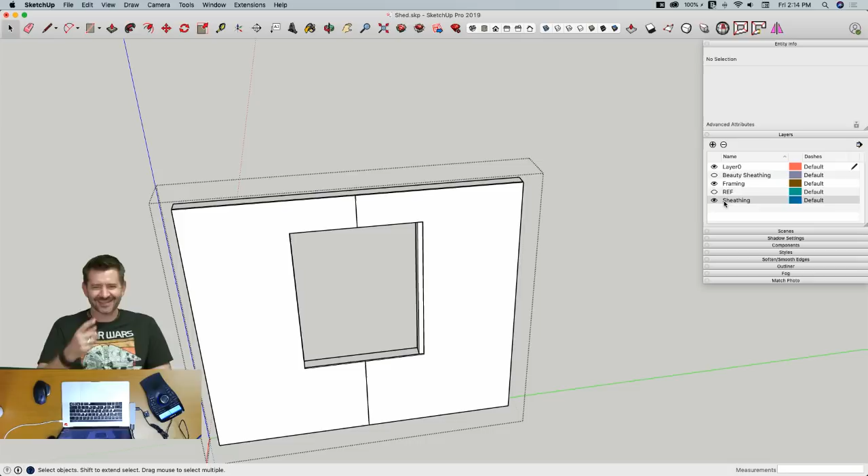Whew, good thing we came into Q&A the framing, huh? All right, I'm gonna hide the rest of stuff. I'm gonna turn off my—oh no! After everything I said, I started cutting on the sheathing layer, not the beauty sheathing layer, after everything anyhow. I'm gonna undo a couple times.

All right, I'm gonna turn off both my sheathing layers. I'm gonna find out why my header is not in the middle. I'm gonna grab all the pieces associated with my header framing, except for the center studs, and move them using the middle of the header as a handle to slide this to the center of the wall, like that. There we go. So now that should be 4 foot this way, 4 foot this way.

Whew. Yeah, I thought when I design in front of a couple hundred people, you guys would have my back there and tell me I was doing something wrong. Now we're gonna try this again.

I'm gonna delete one of the sheets. I'm gonna go into this sheet right here, turn everything back on. I'm going to draw a rectangle, push-pull that to the other side, back out one level, grab this sheet, Curic Mirror, hover over this face, Option click. All right, ooh, that's better. Let's see if I did a good job on the door. All right, so I'm gonna have to do this. I'm gonna have to do the same thing in each of these.

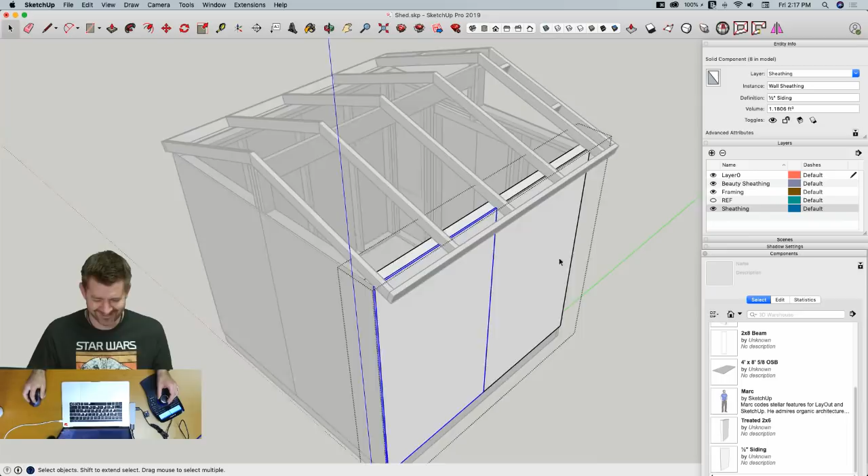All right, so I'm gonna come into this wall, grab my 2 pieces of sheathing, copy. I'm gonna turn off my sheathing. I'm going to edit, paste in place, and then change it to beauty sheathing. So what I did there was I actually had the layer I was working on turned off, but by changing layer after when it was selected, it moved it to the current layer and became visible.

Same thing. I gotta do this in each group. So I'm gonna Control C, turn off. I actually have a shortcut for paste in place on my mouse. And then change that to beauty sheathing.

Oh man. Well, now what's your problem here? Oh, I drew that rectangle on the back. Let's get rid of that. Okay, that did tell me that the front and back are switched on these two also. Maybe you have an issue if I ever have to put any detail on this, which I'm kind of okay with them being extruded rectangles only.

I'm going to paste in place and then move to beauty sheathing. And one more time. Control C, turn off sheathing, paste in place, and switch that to beauty sheathing.

Okay, so now I'm on my beauty sheathing layer. So, dang it, I just did that thing that I do. Both of these moved to beauty sheathing. All right, now I can get rid of that later.

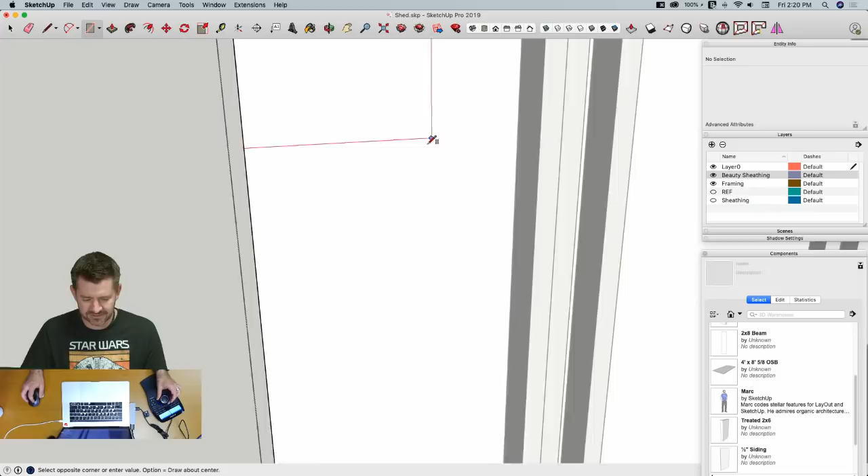All right, I grab this one in the front now, and I'm gonna delete that, grab this one, make it unique, call it 1/2 inch siding dash door. Same process here. Double click to enter, rectangle from here down to here, push pull that through, and actually that kind of leaves a lip here.

Actually, there's something I want to think about with that. For right now, I'm just gonna leave it. I'm gonna come out here, select it, and again, mirror option, and that should line up with the framing. That time it does. Okay, so here's our beauty sheathing with our opening there.

If I turn that off and turn my standard sheathing on, that's actually the layer that I would want to report upon. Oh boy, got it, we got there. That was really something. All right, so a couple things. One thing I would want to consider.

Undoing back past the creation of the component to get rid of it. If I look at my components right here, here's my special components. If I start undoing, and I undo far enough, my component is still saved in the model. It's not actively in here, but, oop, wait, no, hold on, I didn't undo enough. All right, there, if I undo enough, then I go back and yes, it actually disappears. See, my 1/2" siding dash door is gone now. So yes, undoing will actually remove it. That is the answer. Now I gotta redo a bunch to get it back though.

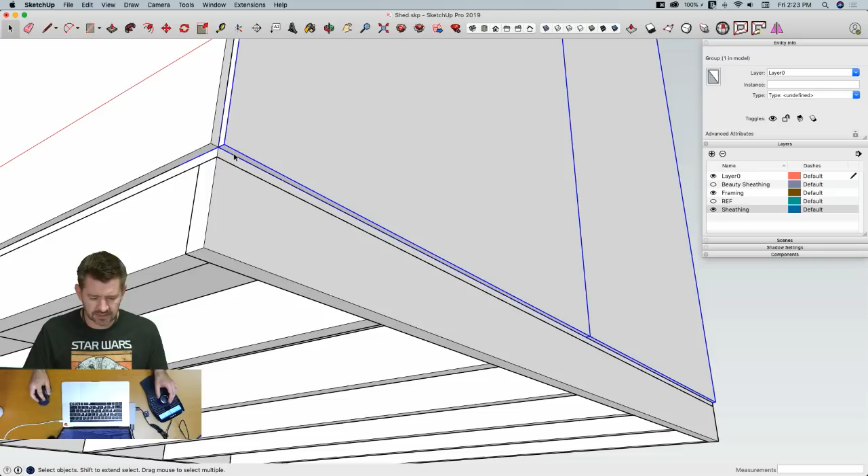So here's a couple things that I do want to point out. My sheathing currently starts at the bottom of the wall. One thing I may want to actually do is have this sheathing extend down to maybe here or something like that to tie that together. That was one of the things I was going to point out, is that probably makes a little bit more sense to actually have that tie down into the floor joists rather than sitting up on top of the wall. Not a requirement, but...

Since I have an 8-foot piece of sheathing already being cut off, I might as well go ahead and extend those up anyhow. So I'm going to go ahead and do that. I'm going to grab my sheathing, I'm going to pull that up.

And this is something else too. That's a little bit long because I'd actually only be able to sheath right here, but you get that. All right, so I'd probably want to do something more like that on my actual sheathing layer. I'm going to just drop those down.

So something Nathaniel's pointing out is, yes, my sheathing is butting up rather than lapping. Again, because my boards are exactly 8 feet wide, they're coming to the corner but not lapping over. I don't have enough board here to push this through an extra 1/2 inch to cause my boards to lap. I'll put some sort of a corner on there most likely to account for that.

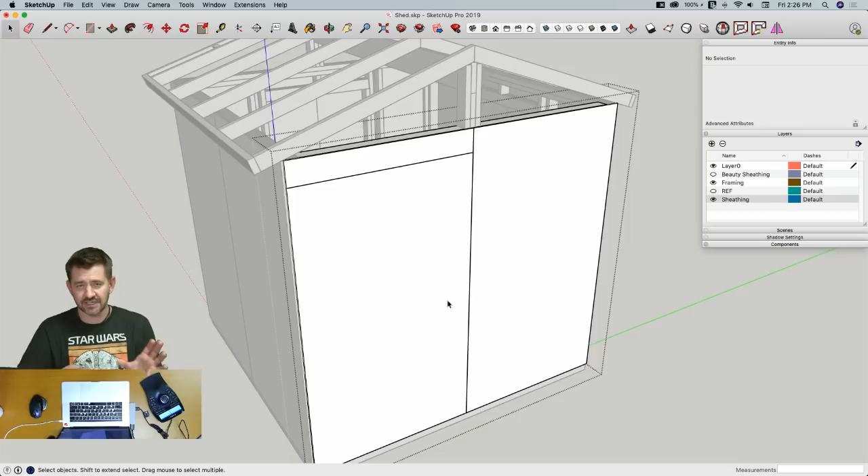So I do have to do something right here. I have to close this up. So I would probably come in here and, depending on this sheathing, so if this sheathing has texture on it going across, then I have to maintain orientation. I would have to keep that in mind when I come to fill in this backside with material.

If it's not, if it's just a solid piece, then I could actually do something like grab this board, throw it right here, and I could cut out my shape to put just a piece to close it up.

Same thing over here. I'm just thinking right now, this is me talking out loud as I consider possibilities. Since this is an 8-foot sheet, it will actually go from here to here. So I could take this board and I could actually cut just this triangle shape out of it to close up the back side of this gable. And then I could take what's left, I could cut out enough to cover this portion right here too. So that would work.

Assuming there is no orientation to this, whatever siding I end up using, if it's something like a board pattern going one way that shows that, then if I flip it, I've got an issue.

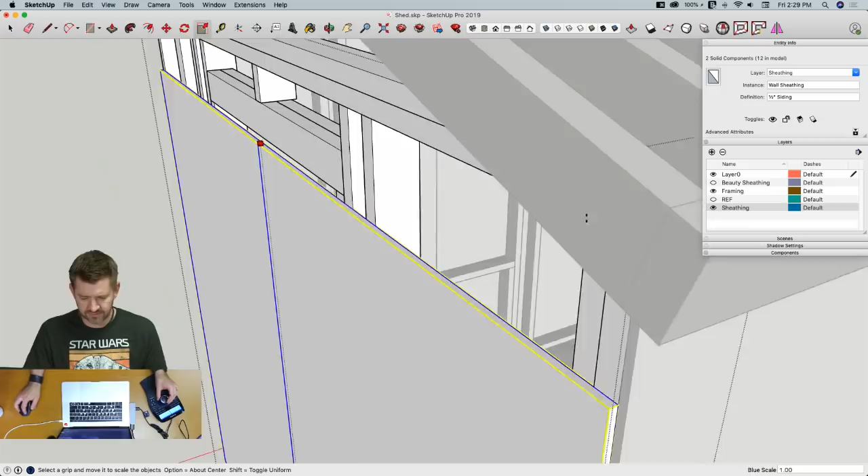Wait, are you gonna be able to get those two pieces out of one piece of OSB? That's what I'm wondering. If I make way... there we go, drop that down half an inch. Now I can actually paste that shape in.

Push-pull it 0.5 inches. But temporarily I'm just going to group it because I want to see if this even fits. And then I will stick it right here. Oh yeah, look, plenty of space to cut that out. I'll have these fun leftover pieces to make some wings out of or something.

All right, so I'm gonna go in here and I'm gonna make my line here. Make my line here. Push-pull this through, and then I'll actually take this.

I just made a group to temporarily isolate the geometry, but now I'll actually make it a new component. And what did I call that last one? Half inch sheathing, half inch board, gable small. Something like that. I told you, I will name components, but they're not always pretty.

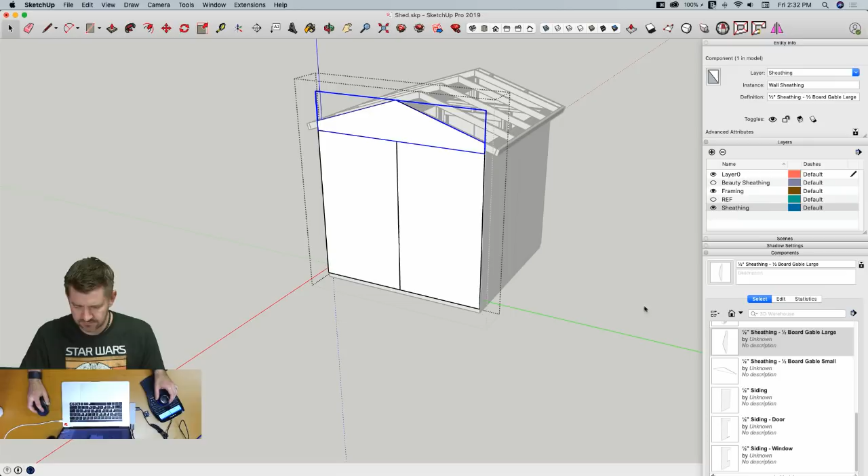So I might want to actually come in here to complete this thing, copy that, paste in place, and move it to beauty sheathing so that closes up properly. Oh, but then I gotta come into my beauty sheathing. Oh, come on, beauty. Gotta take both of these and scale them down so they're not too... it's not gonna work.

All right. It's occurring to me that I'm trying to satisfy multiple needs here. Maybe not the ideal way to do this. I'm trying to make it look good and feed Generate Report perfectly. I may want to actually choose one or the other, or maybe even have multiple versions of this model. So anyhow, just something to think about. Why am I building the model? What do I actually want out of it?

That's all. Turn sheathing on. See, paste in place, and then change that back to beauty sheathing again. All right, so there's my beautified sheathing. So I'm gonna throw some more sheathing on. This is the last piece. I do have to sheathe my roof. That's gonna be a great spot to have sheathing. Some would say that in a structure, the roof sheathing is maybe some of the most important sheathing.

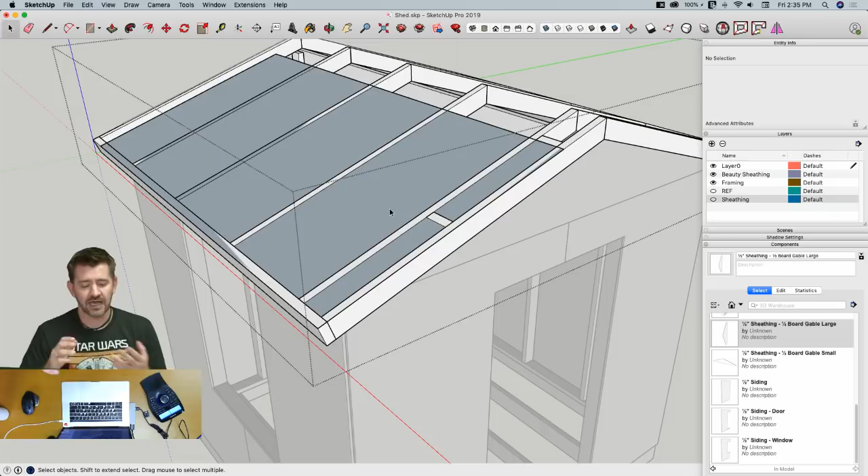With sheets, you want two things. One thing you want is you're going to want to report the total count of sheathing, so you go buy your material and know how many pieces to get. The second piece is going to be potentially the cut sheet information - how many pieces do I actually need and what are the cut dimensions. That's all going to come down to how confident you feel pre-cutting your sheathing versus putting it up, marking it, and then taking it down and cutting it. But two different masters here that we have to keep in mind.

One of the things people do a lot with professionally framed roofs is taking one piece, cutting it, and then using the offcut in a different spot. Thing to remember about this sheathing is usually it's tongue and groove - two of the sides will have a little piece of material that sticks out, and the other two sides will have a groove that tongue sticks into, so they interlock. It does mean, however, that every piece has to be the same orientation. I can't just chop a board off here, turn it 90 degrees and plop it in over here, because it will be out of orientation with the tongue and groove.

So that's a whole bunch of things to say. I don't really know how we should do this. Again, kind of like what we did right here, I might have to do a little bit of a reminder to myself to say, 1, 2, 3, 4, 5, 6, 7, 8 pieces, 9 pieces of wall sheathing. Up here, I'm immediately going to have to come in and chop - what is this - 1'6" off of this first piece, and I don't know that I have a spot to relocate 1'6". So this may just be its own full piece.

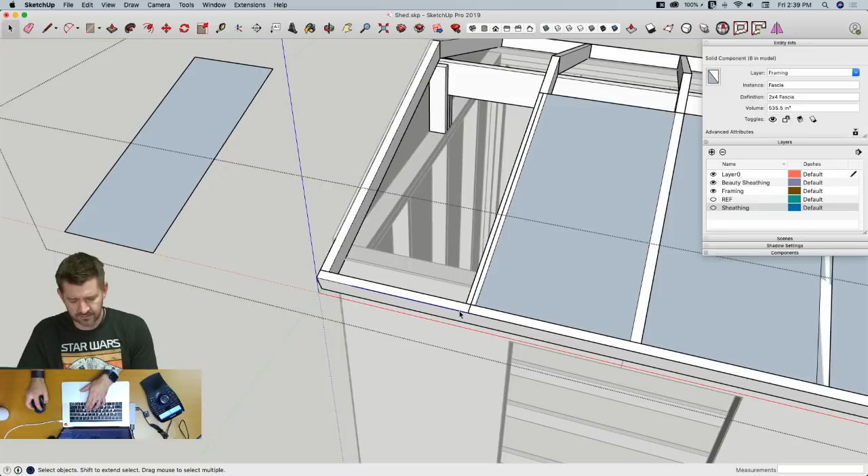So what I'm gonna do here is I'm gonna come in on this one piece - oh, I have an idea, I just thought of how I'm gonna do this. All right, so each component I create is going to be its own piece of sheathing. I'm gonna grab this and draw a line here, splitting right at the center of this rafter. I'm gonna grab this sheet right here, cut it - whoops - copy it and paste it right over here off to the side, then trim it off. I don't know if this is gonna work, but I'm gonna try. All right, so that right there is sheet number 1.

So I'm gonna make this 7/16, or 5/8. And I'm gonna call this - I'm selecting all this geometry, I'm gonna make it into a component right now, and I'm gonna call this roof sheet 1. Boom, put it on just like that.

Now in this group, I'm gonna take this piece right here - no, I'm not, that does nothing. I really can't do anything with this off-fall, so I'm just gonna delete it. All right, there's my sheet number 1, done.

I thought I had some cool things I could do there, but I don't know how to save that. The next one I'll be able to save. That less than 2 feet that I cut off, there's not a whole lot I can do with, unfortunately, so I got rid of it. This next one, I'm gonna take a copy of this one, option copy, drop it right here, and make this unique and call it roof sheet 2.

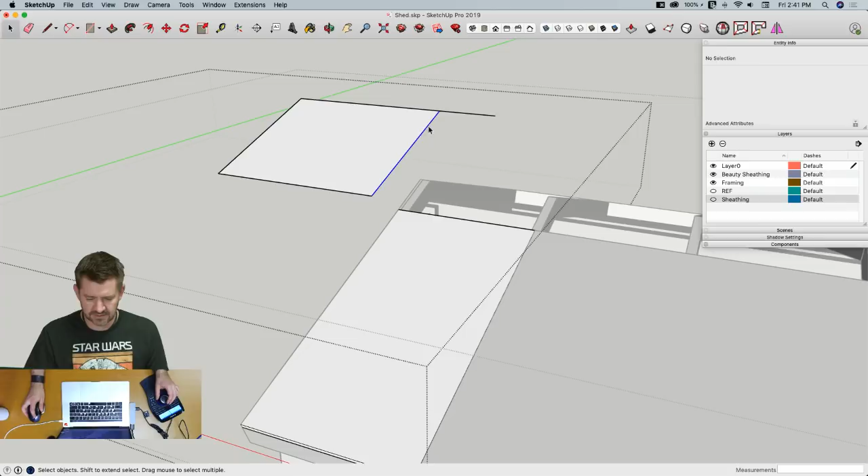If I put a full 8-foot length, this is a full board, and I take this and align it to the end, I now realize that all of this can be cut and pasted over here. Now I'm just going to move this piece over to here. Oh, I need a snap point. Move this piece over to here. Oh, stop making me look like I don't know what I'm doing.

There we go, I'm gonna offset that. And now I can actually take this piece right here, swing it around, and use it right here. Oh, so close. What if I put it right here?

I'm losing material either way. Yeah, I'll just leave it here. Push that back to here, and back another 3/4 inch.

All right, so now, because this is one component, when I do a quantity and start counting the pieces labeled roof sheathing, I know I have 1, 2, because this is the same piece cut in half, and now I'll have a third one over here. This one, unfortunately, is going to be pretty much a full sheet just to get this half.

So Aaron, you know, my wild card idea here, which I don't think we'll have time to do, is to create a custom dynamic component attribute. Basically, you could program that attribute to be a percentage of the length of the standard unit measurement of that piece. So in your report, you'd have the length of the cut and also what percentage of a piece you'd buy it is. If you tallied up all the percentages in the model, you'd have the number of pieces you actually need represented as a percentage.

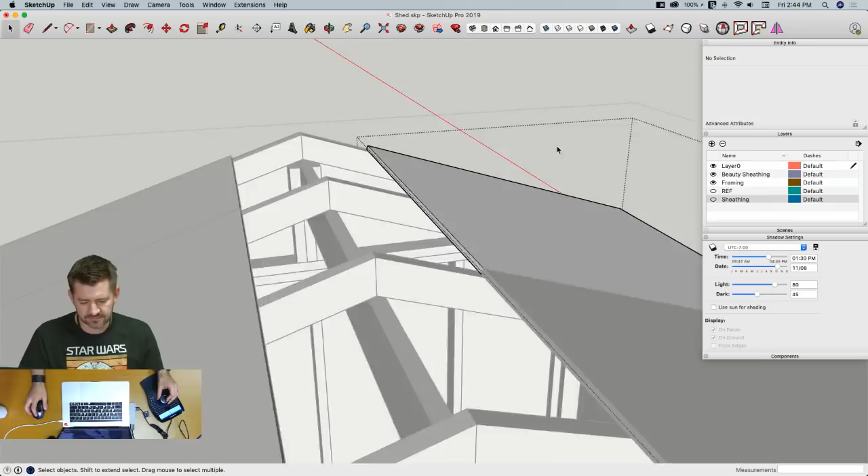Is the vertices of that sheathing component gonna mess up your report right now? Because if you select one of those roof sheets - yeah, I guess if I wanted to get the cut length off a full sheet, what I should do is, you're absolutely right, I should come in here and say put red here and then blue here, and that will give me the actual cut length of a full sheet.

That way my formula will work, right? But this one, I would have to definitely do this one differently because having this sheet in 2 pieces is not gonna work. Because the overall length of this piece is going to be 8.5 feet because this geometry is too big.

We got too - that's what I'm saying. We're trying to serve too many masters right now. We're trying to do everything, which I'm a fan of. I like doing everything, but sometimes you got to think more - not how much thinking I would do when I'm winging it like this.

All right, so here we have - how much is this? This is less than a foot. So we should be able to sheathe the rest of this with one more sheet. See, I like that. Somebody just called out, well, in New Zealand, we use corrugated roof, so done.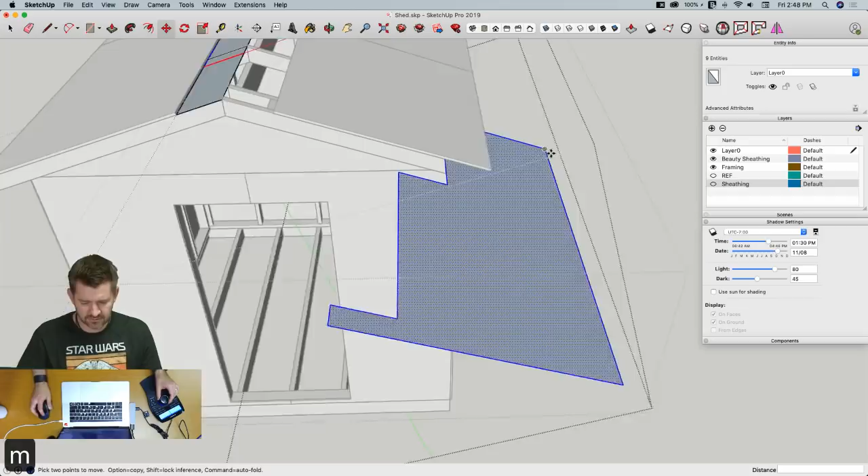So now I need to take that, use inferencing to rotate that down, and now I can grab it and slap that right down here. Oop, I should actually take that out a little bit further to account for the sheathing. There we go. Control C, Control V.

And look at that. Then we take that. I am ignoring the tongue and groove, assuming that we'll be able to cut it. It'll work for half of them. But...

All right, so we end up with that, which we can now - I want to hang on to that profile so you could have a plan of how to cut that last piece. Whew, look at that.

Yeah, this is an extra board. You give this to your kid and you can go make a ramp out of it or something. So that would kind of work.

And like I said, because of the way I did that, I'd have 1, 2, 3, 4 sheets that will show up in my inventory. They're going to show up with some wacky dimensions, so that's what I was saying. What I may end up doing is coming up with a separate sheathing report that will give me all of that.

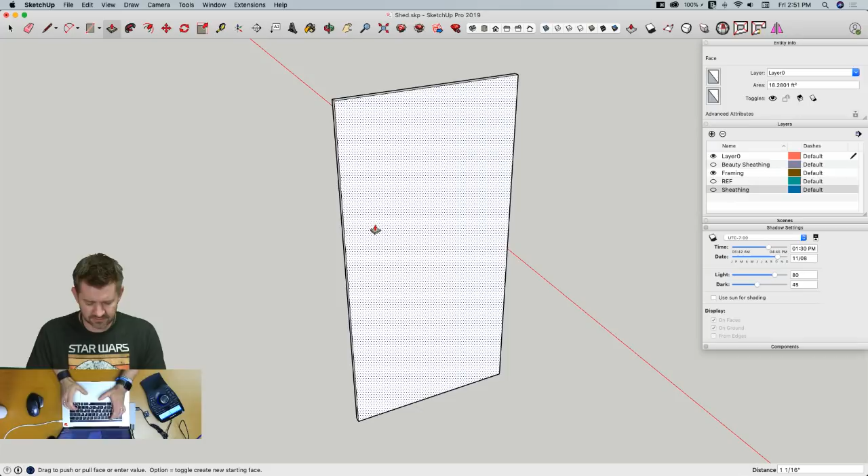Assuming this is going to be the same 1/2 inch material that I used before, I'm going to make that its own component and call it 1/2 inch sheathing, door sheathing. Create that - and of course I'm not just going to have a piece of sheathing that's going to be a little on the weak side, so I'll come in and put some wood around here to frame it.

I'm going to go grab one of these, copy that, and come back into this group - oh, I don't have it in a group. I'm just going to paste it, and I will scale that back.

All right, some of you may already be calling out that there's going to be a problem here. If you are, good for you. If you didn't call it out, then don't pretend you did - don't say you knew that was coming. Because... let's get these pieces on here.

I would probably want to put some sort of lateral support, because it's going to have a habit, it's going to want to twist a little bit. So I'd probably put some sort of lateral support in here also, if that was a cable, a tension cable, or I could actually put a piece of material here to here.

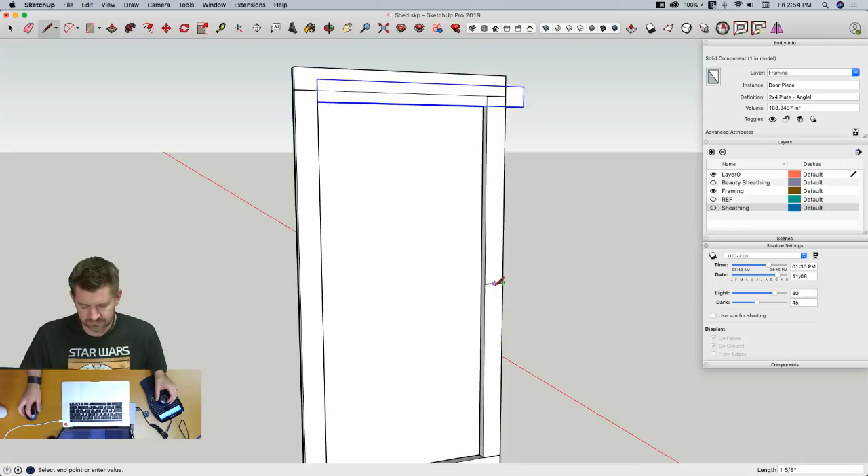So what I'm gonna do is take it and rotate it so that it meets right here at the middle. So I'm gonna select it, go to rotate, pick. See, I intentionally placed the middle of this piece right here at the intersection. Now I'm gonna rotate and stay on the red axis, and click down to the middle of this point here. Now I'm going to spin it to where the projection line hits right there.

So this doesn't have to actually lap the point I'm snapping to, it just has to point to that spot. Then I can select it, use scale, because the axis is still lined up, and I could scale it down here. If I wanted to keep this as the same component, I could actually just leave it just like that.

I could leave it, and I could take this, do the same thing, click here, option, rotate that down to here. I could actually be finished with that like that. Knowing that when I actually frame this, I'm gonna come in and cut these little corners off to make it fit inside that frame.

That would work, that would actually be totally acceptable way to do it. And that way I could save this as the same 2x4 plate. I wanna go further because I wanna come in here and cut these two pieces back, and notice what happens here. Uh-oh, bad things.

There we go, and pull that back and that back, and that top piece looks good, the bottom piece looks bad because I rotated it. What I should actually do, delete, select it, and I'll use Curic Mirror again, hover right here.

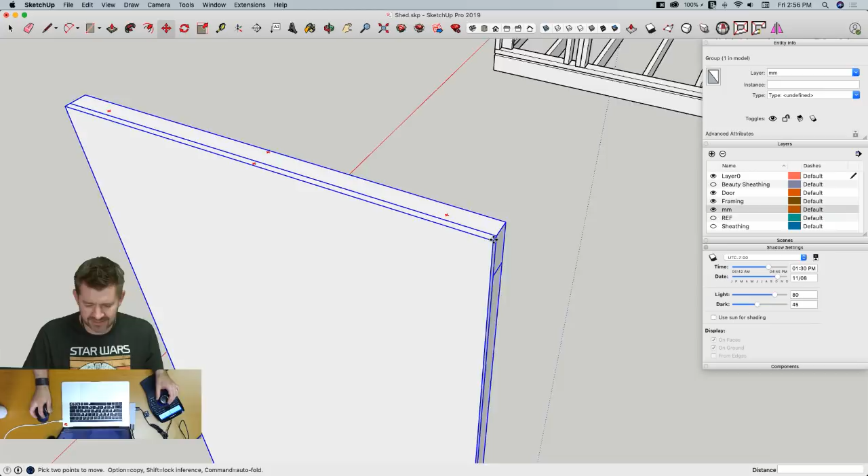All right, so I made this door a 1/16 inch smaller, right? So it should sit just inside a 1/16 inch all the way around. That looks good, it gives me a little bit of clearance. Wood's gonna swell, gonna move, gonna whatever. 1/16 inch actually, for an exterior shed, might be a little too small.

I might even wanna go like a 1/4 inch, or an 1/8 inch, to give myself a little more play there. But here's the thing that's gonna happen. So depending on where I put my hinge, I'm gonna just draw a line straight up from the edge there.

I may run into a problem with how this door rotates out. If I start rotating it out like this, it looks pretty good, but let me zoom in - do I have enough space to clear? Here I was planning on having caused a problem, and looks like I did such a great job designing that it may just clear. Yeah, but now it really looks like this door's not going to slide, at least not this afternoon, not before we need to go to happy hour. It'll slide someday, maybe.

All right, that actually worked way better than I was expecting. I do want that to be out because I'd want my siding lined up with my siding. So I should pull that out half an inch and turn my sheathing back on. Let's look at my sheathing to see how that lines up. Ooh, yeah, looking nice.

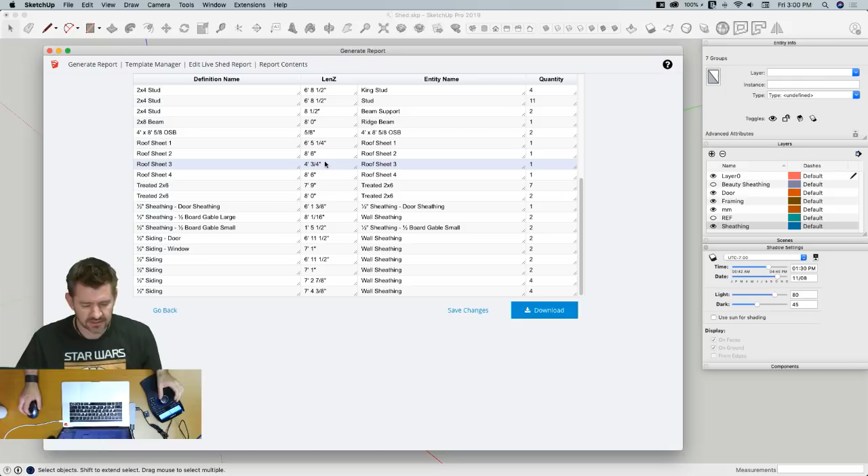If we look at this, here's my fascia boards, I have 2 different lengths, that makes sense - the little blocks I put in there were called fascia, and my long ones across the end. My angle L board for the door is a special piece because it's angle cut. Got door pieces, headers, all cut out of plate material, and here's some rafter material, got 12 of those, a bunch of studs, then my beam. Then I have a whole bunch of sheathing. My sheathing has some weird dimensions because it's showing me the Z length. That looks pretty cool.

What I may do is go back here, go back even further. I may actually take this and call it lumber, and save that with the intention of running that specific report with my sheathing off.

Now I gotta go into my door group real quick because I did not assign the individual pieces to the proper layers. This should go to sheathing, these right here are on framing. Okay, so here is my frame materials, my lumber right now. Got loose geometry, just spotted it - that'll keep me up at night, that kind of thing.

Whoops, too much. All right, so here I take just my shed material, my lumber material, go to File, Generate Report, and run the report on that one - just what's selected. Go back, edit, again level 2, I'll save it this time and run it. Go back again, let's check everything. All right, current selection, level 2, save changes. Now select this, generate report, run it.

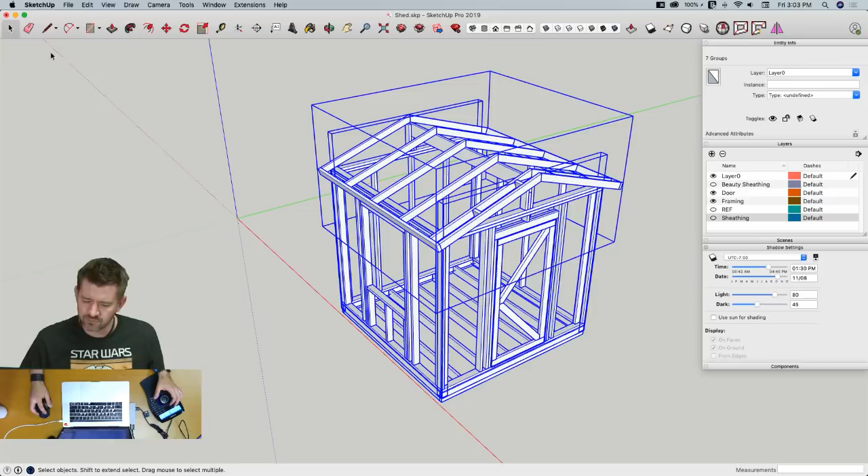All right, what am I doing wrong? Sorry, I'm cleaning up extra geometry is what I'm doing. Turn my framing on, my sheathing on. If I turn sheathing off, select just this geometry, and then generate my report - still getting my sheathing. So by being outside the group, when it goes in, is it selecting things despite visibility? I don't know, this is rhetorical right now, but I'm hoping somebody knows.

So that's what I want to export as my material list for lumber. And then I'm going to go back here, duplicate my current live shed report, make it for sheathing, edit that. I'm going to change what I have here - put my definition entity name and quantity, but I'm going to show, I don't know what this is going to look like, I'm just going to do it though. I'm going to show my XYZ length and run the report.

So I'm going to turn framing off, sheathing on, select all that, and then generate report. Sheathing - save that and run it.

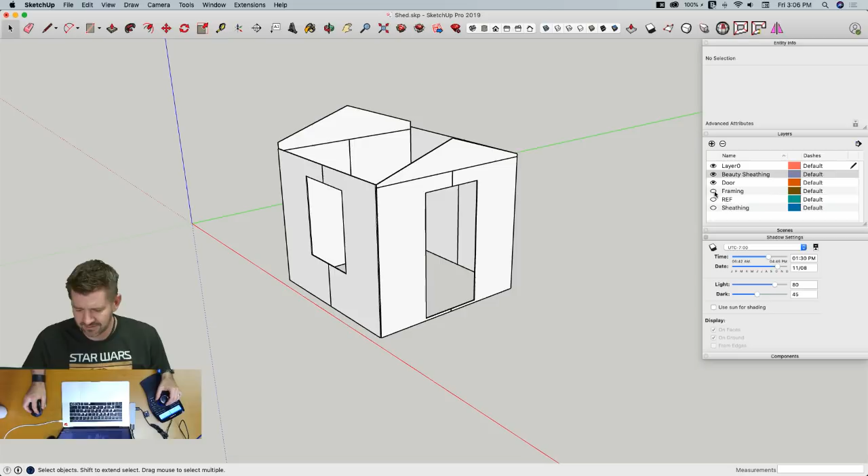I wandered off into the woods there for a second. Let's close that. Let's go back to here. Let's turn our beauty sheathing back on and our framing. All right.

That was framing a basic shed. Kind of scrambled trying to think of some other things to show there and just kind of wandered around. I apologize, nobody wanted to do that because I did it. Does that make sense? Everybody kind of like that?

Let's see, I'm going to grab some of these pieces right here. I'm going to copy them. Paste them. Nope, I'm going to paste them in place and put them onto a beauty sheathing layer. That way I actually have those there. And I have another empty layer. All right, good.

Yeah, so that makes sense. Is everybody liking that? Like how that turned out? Why did you? Oh, that was on me. I'm gonna put these back on beauty sheathing. Delete this empty layer. I have a really bad habit.

When I tap the space bar constantly, it's like my default. Let's go back to select. It's actually on my mouse, I have it mapped to the thumb button. I have a button under my thumb, and I tap on it constantly. And what I don't pay attention to is when I'm editing something, the fact that the focus is on a field in here. So when I tap the space bar right now, it just went and overwrote the instance name to space, rather than just because my mouse is over here doesn't mean the focus isn't somewhere else.

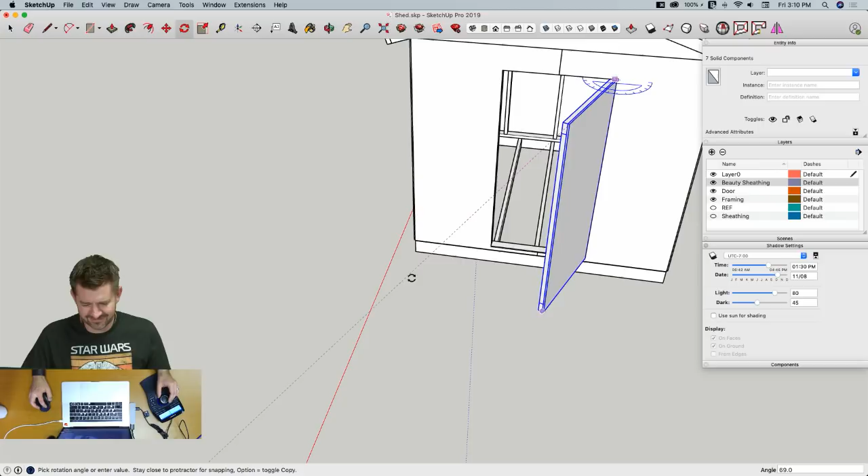We did not get Mark's sliding door detail on here. You know, I figured out how to do that percentage of the cut length, basically. So if you create a component attribute and you just make a custom attribute, which would be the percentage of the cut length that you would do. It just equals len z divided by that length in the default inches, and that gives you a percentage for each component instance of what the available cut length is. That's cool, and then that would just be a custom attribute you'd pull into your report.

Do you have that as a sample thing we could throw up? I'll throw it onto the forum thread with the finished shed model. But the problem with it, actually I think it's kind of a cool idea.

You would just make the first component that way, and this is actually a comment I have about the entire workflow. I think you should be making unique all the time, because then every component would already have the lens in the orientation you want. You wouldn't have had that problem with the sheathing. So maybe a keyboard shortcut for make unique would have made your life less of a hassle.

Thinking of ways afterwards, you could actually invert instance and definition name, right? Because instance doesn't have to be unique. So your definition name, your actual component, could be separate, but you could have the same instance name on it, which would allow you to still get a cut sheet of all the same material types. Yeah, absolutely, that's pretty cool.

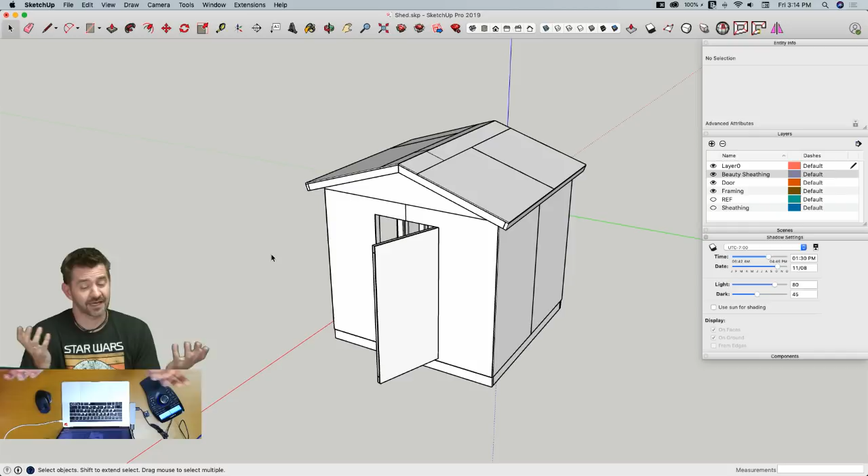images or plans, machining plans for solid lightsaber hilts, and they are so cool. I couldn't help it, I'm like, I got to do that, we got to model that. We're gonna look at using some follow-me to simulate lathing and solid tools to simulate machining.

So next week we're gonna come back here and we're gonna make 2 or 3 of the lightsaber hilts from the original trilogy. So that'll be fun, that'll be a good time, that'll be cool. So hopefully you guys are up for that, and you'll swing by next Friday and see that.

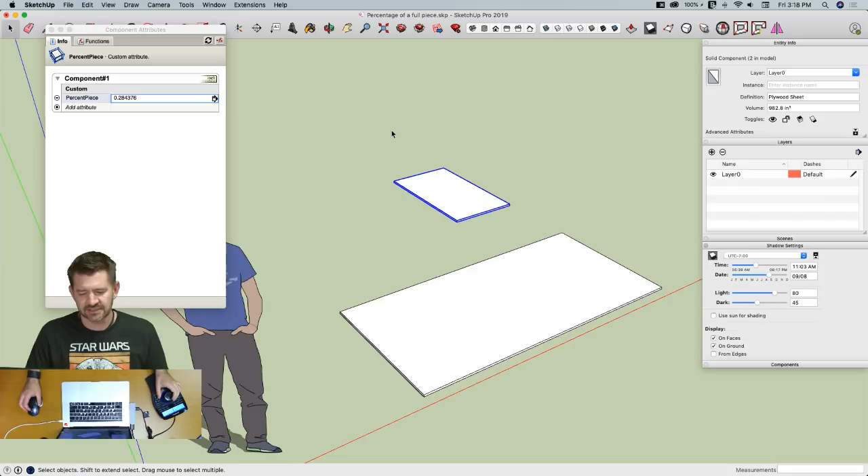Hopefully, if you guys want to go back and recheck out any of the details, there was a couple spots where we were just kind of winging it and trying to make stuff up, but yeah, there's some good things to be learned in there.

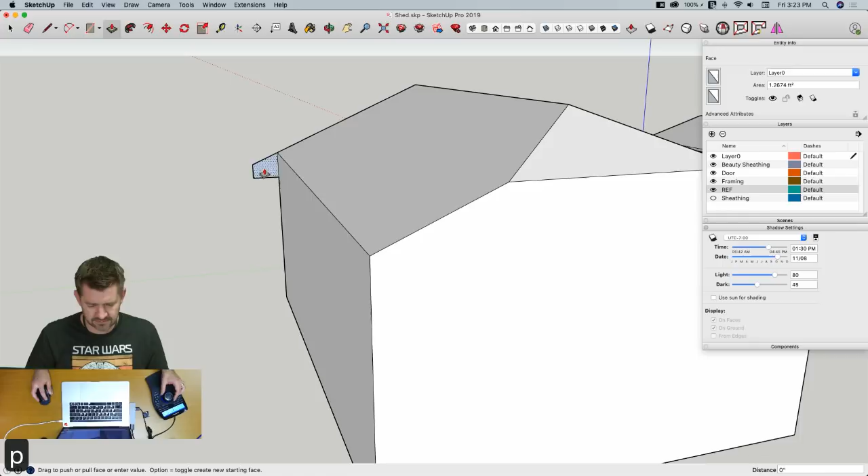So if I was to take this, put that here, here's how we can go about finishing that up. I'll take that one, use rotate to put it on the other side of the building. And then I might do something like... actually that would not drop, that would do that.

This would seem like it would be overkill for this shed. Yes, it would be, but it was more an issue of showing the roof type than it was for the specifics of this specific model.

I take that out ever so slightly. However far I'm coming out, I'll just do 6 inches. And then I could continue this line, this line, this line across, and that could get me my overhang. Obviously with that, I'd have to bring this one down, this piece down further. You get the idea. So that was the request for this kind of roof.

I've heard it called, what do we always call that? We always call that like a gable hip. There's a bunch of names here. Got a half hip, Dutch hip, Dutch gable. I can't remember the word that he used. Yeah, Dutch hip or Dutch gable is probably what I would have called it back when I was designing roofs. He had a different name for it.